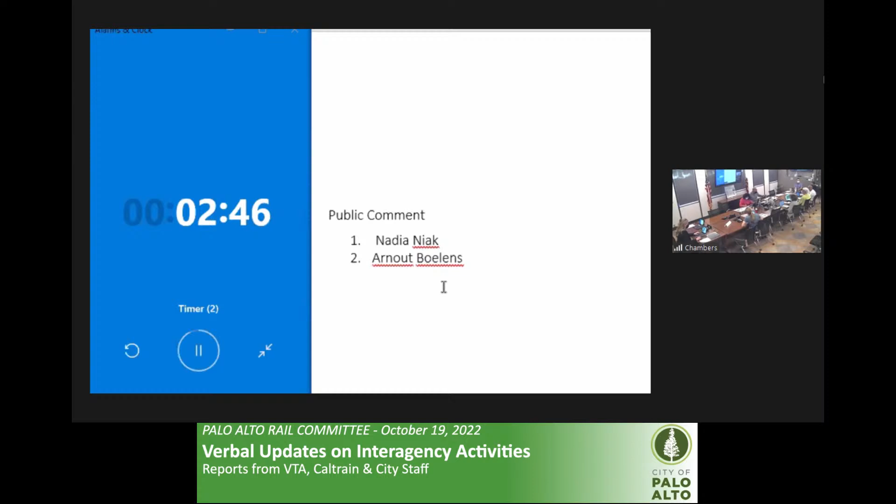Okay, we have a few speakers. So Nadia Niak, you can go ahead and make your comments. Thank you. I just wanted to see if we have an update on the Measure A 2000 money. I had done that research that there was Measure A 2000 money available for the update of the Palo Alto Intermodal Transit Center. And we'd expended about, I don't know, $200,000 of it, I think. And there's like 49 point something million left. Hopefully we can come around with our hat again and see if we can get some money from there. So if you could give an update on that, I'd appreciate it.

Good afternoon again. Yes, we are exploring the allocation that was previously from Measure A funds for our PAITC project. So we are exploring it, but haven't made any progress yet. I'm sorry, and apologies to cut in here, noting that I'm in transit, but we do have a response from VTA, which was recently shared with the mayor, and I'd be happy to share it with you at another time. You don't want to just share it now? I'm sorry, Mr. Kamhi. I'm just wondering if maybe we should all know.

Yeah, I'm so sorry. I definitely would like to provide an update on it. It's a little bit complicated, and unfortunately I'm driving right now, so I'm trying to concentrate on that so I can get home. But in brief, the VTA board had already prioritized projects for the use of that funding, and our project was not selected as one of the prioritized projects. So that's just the brief summary of it. Thank you, Mr. Kamhi.

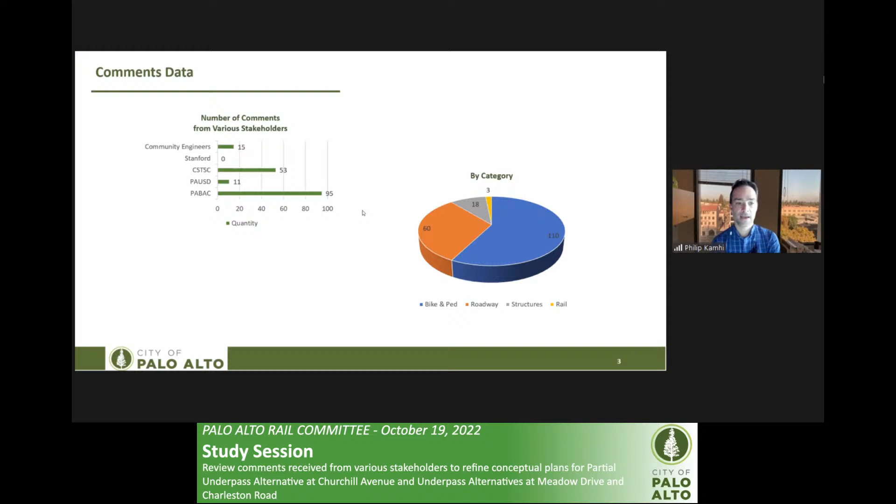And the next slide shows some additional details about the types of feedback, the categories that they fit within. And then the next slide. I wanted to also note that we had received additional information from the PTSA, the PAUSD subcommittee, and also there was a Gunn High School survey.

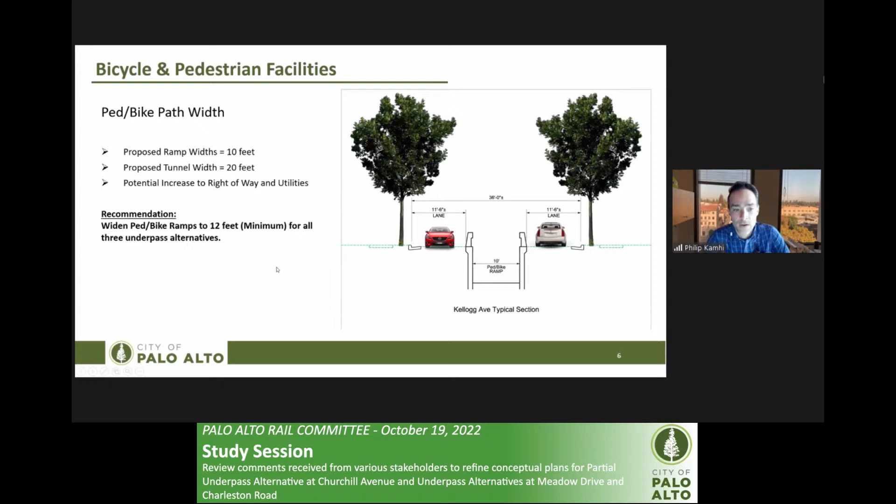So finally with that, I want to let you know that we're going to go through slides that have each of the additional refinement recommendations, and we'll pause with each slide for a discussion if Rail Committee is interested in discussing each of the items. And then this next slide, I'm going to turn over to our consultants at AECOM, Millette Letzinger and Peter DeStefano, who will discuss each of the proposed refinements and recommendations. Great, thank you, Philip. My name is Peter DeStefano. I'm a civil engineer with AECOM.

So let's dive into some of the comments from the stakeholders. Some have expressed a concern about the high volume of bicyclists that'll be entering the facilities and using facilities during the peak times shortly before and after school. Now, except for the tunnel at Kellogg, which is 20 feet, and the two-way pathway for the Meadow and Charleston alternatives, which is also 20 feet, the width of the ped bike ramps for all these alternatives was set at 10 feet. We're recommending an increase of this to 12 feet based on the comments received. This will potentially result in additional impacts to utilities and right-of-way and slightly increase the overall cost.

Could you hit? There's a little bit of an animation here. Yeah. You can take over the control. Or can I say again?

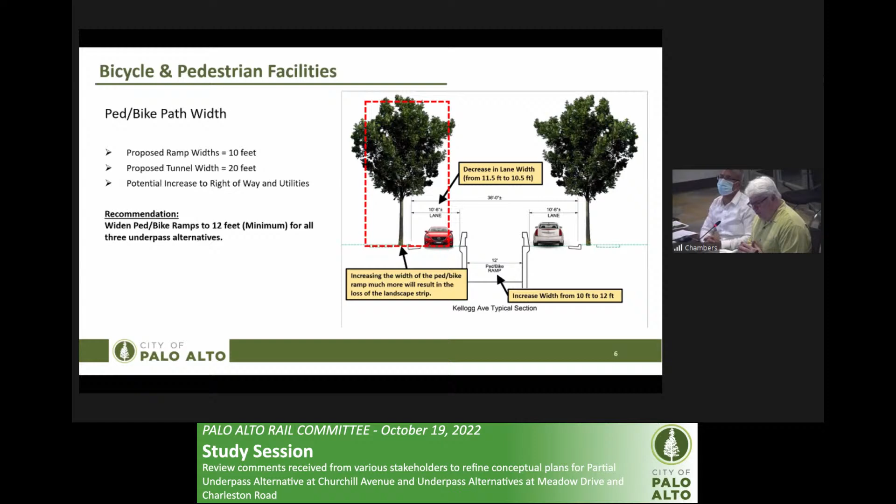So we're seeking the rail committee's direction on A, the width of the ramps. Is 12 feet sufficient, or should the width be increased beyond that? And B, whether conducting a traffic study to determine a level of service for bicyclists and pedestrians is desirable. Again, that relates back to the comments about the concern about high volume of traffic shortly before and after school.

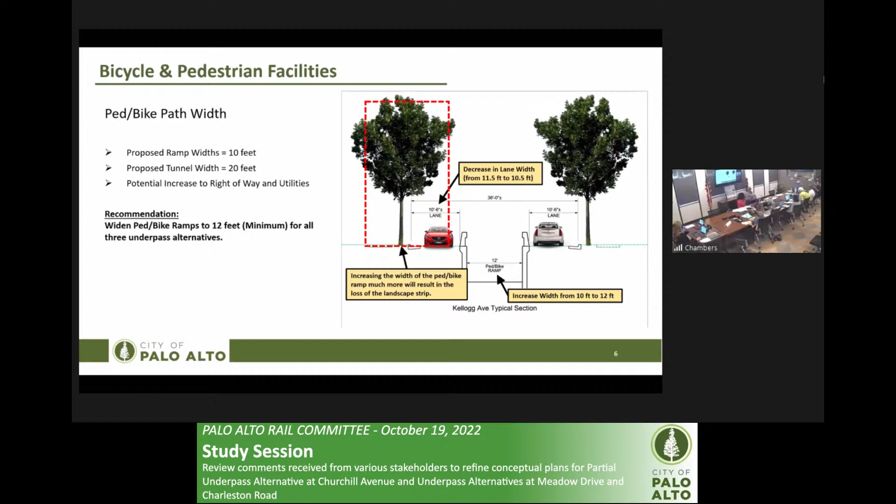So we can pause after each slide to seek your feedback, maybe. Okay, if you want to do it that way, but I also want to be cognizant of public comments. The public doesn't need to speak on everything, but they could. Yeah, they might have input. Okay, well, it's up to you. We can just go ahead and have an exchange. I think segments, questions, okay, yeah. That can be fine. And then we can have comments in that rather than. So do you want to go first, Mayor Burt?

Sure, thanks. So 10.5 feet for the vehicle lane. Is there parking or no parking on the streets in that model? Yeah, there would be loss of parking on the street. There's only 10.5 available for the traveled way. Okay, and the 10.5 foot lane in a residential street without high volume, is that pretty comfortable? Yeah, 10 feet is probably as narrow as you want to go. So 10.5, we'd be okay with that.

Okay, and then the Kellogg location, what are the current assumptions on, well, I guess this links with this traffic study question, which is really where is the bike flow coming from that might use this location versus Seale or something in the vicinity of Seale? And have we done any analysis of that yet, or have you engaged with our Safe Routes to School program to see if they have any such data?

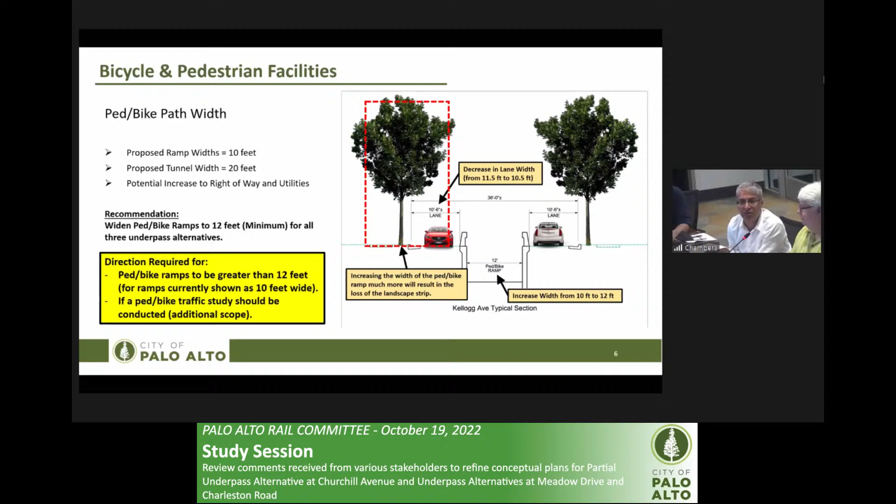One more question. Yeah, sure. So what is your outreach to the community on the two streets about the parking? Obviously, that's going to have to be pretty robust. Chair Kou, the outreach for merits of Kellogg versus Seale would be considered as part of the bike and ped transportation plan update. And as part of that, the outreach element will be included. Okay, thank you. Are there any other comments or questions? In that case, we can move to the next section. Very good.

So this is showing a plan view at Kellogg. The ped bike ramps that we have shown previously in the past couple of years on these exhibits were based on 8% grades of the ramp with 5-foot landings every 35 feet. Some of the stakeholders, some of the comments we received believe this is too steep and they would prefer a flatter slope. So you can see here on the slide, we show a 5%, comparing it to the 8% with landings. With the 5% grade, the grade is, of course, flatter, but it increases the length, in this case, by 80 feet. It would depend on how much the elevation difference is, but in this case, it's about 80 feet. So we're seeking the committee's direction on this item. Should the slopes be revised to 5%?

And the current slope is what? Yeah, so the limits of the pink are based on an 8% grade with 5-foot landings, similar to what you would see for the ramps at a ballpark. They're ADA compliant, but some feel that that's a little bit too steep for bicyclists. So they've asked us to revise that to 5%. So the drawback to the 5% is that it's similar to increasing the width. You have more excavation, you're increasing the limits, increasing the footprint of the project. It may impact some right-of-way, utilities, et cetera. So similar issues as before.

Okay. And at Kellogg, it's a little hard for me to see. Is that half of the first block in the pink? Is it all of the first block in the pink? Like, is that crosswalk at a street? I think it's halfway. Oh. Sorry, if that was Ripon, I couldn't hear you very well. Yeah, there's a crosswalk in the picture. I'm pretty sure it goes to the end of the block.

Peter, can we confirm? Also noting that Castilleja is on that corner. So if you expand past that intersection, you're now in front of Castilleja. And I'm assuming if you have to go further than the intersection, you have to build a wall and not let cars go through. That would also change the traffic patterns.

If you go back to the graphic, I think it shows the crosswalk. Right. Yeah, that's a proposed crosswalk as part of the improvements. So Emerson Street is further down the block, so it's maybe half the block. Oh, thank you, Ripon. Okay, I thought that was an existing one, that makes sense. It's a proposed crosswalk.

So it's half the, sorry, if you can go back to the Google map one, actually, that was super helpful. The pink right now at 8% is half of, is that the whole block? Oh, there we go, I see. When you say the whole block, you mean to Emerson? No, definitely not. I want to say it's less than half. Looks like there are 10 houses between Alma and Emerson on Kellogg. And how many are shown on the pink one? About 5. Okay, so we're already at half the block at 8%.

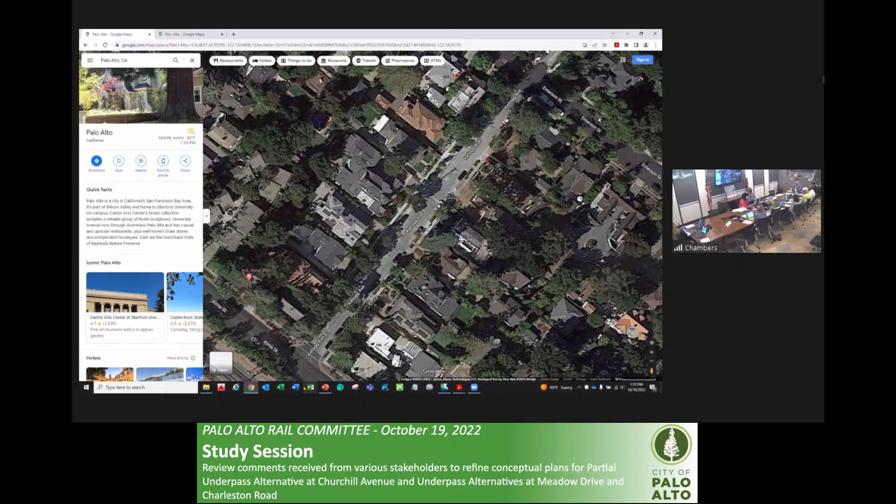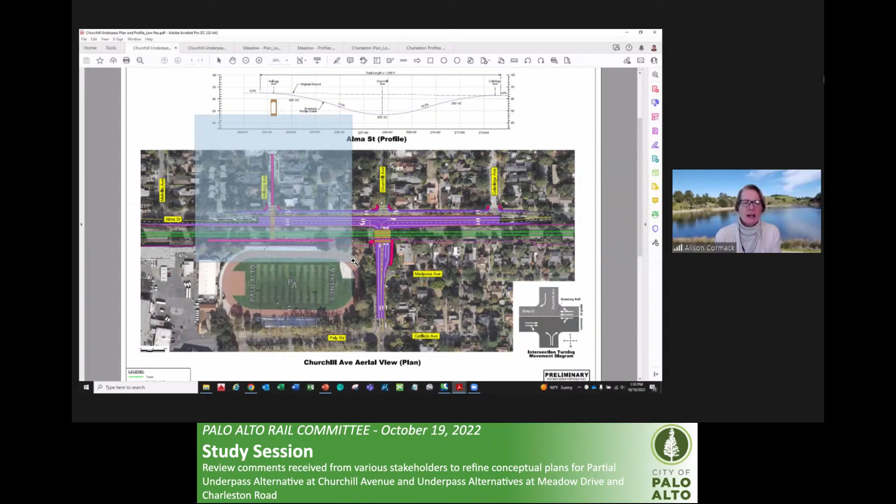Maybe this image is better. Better? No, not really. Well, it does show the houses though. I think that's really what's helpful is to see the houses. 1, 2, 3, 4, 5. About 5 houses. Okay, so halfway through. Okay, great. This is a tough one for me.

This is the difference between what is doable and what might be ideal for one mode of travel. So this one is hard for me. I think just at an order of magnitude, it would be much more expensive to do this than to do the 12-foot that we just agreed to on the prior slide. And I see Mr. Kamhi nodding. So unless there's something I'm missing about some particular use case, I think 5% seems like it would be ideal, but since we don't have an ideal situation, for the time being, I'm comfortable with the 8 and the landings, which I think everyone will appreciate.

Can I just add one thing? I don't think we're trying to make a final decision on what's going to be constructed. We're just trying to make a decision on what to move forward with in the planning phase here. So I don't want anyone to feel like the decisions made here today are going to last a lifetime. Correct me if I'm wrong, Ripon. Right. It's for the refinement of the conceptual alternatives. So the question is, should we refine the conceptual alternatives to have a 5% grade and see what that looks like, which has impacts, as you mentioned, or should we leave it at the existing 8% grade as was originally designed in the concept? Go ahead.

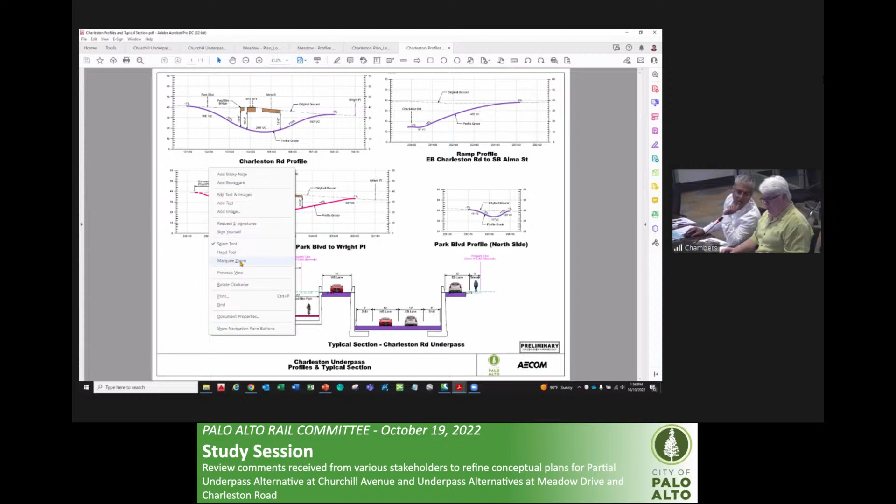I have it up here. I'll pull it up. So this is the one at Charleston. This is the main ped bike ramp. We do show it at 4% on this side and 5% on that. Are there other ramps you're talking about? Correct. Okay. Because this is a pathway, right? I'm talking about ramps. Oh, you're right. I know what you're talking about now. Thank you for clarifying. There's a ramp over here. Let me zoom in. I forgot about this one. There's a switchback ramp here that's based on 8%.

Correct. And in this particular case, changing to 5% would have property impacts, so keeping it at 8% with that same landing would minimize those kinds of impacts. Yeah, we're probably looking at some kind of different configuration of this ramp to avoid the impact to this property over here. Thanks, Ripon, for mentioning that.

Can you go to Nadia? Okay. Thank you. So I wanted to thank Ripon for his comment, because it's hard to apply a formula to one side and not think about the impacts project-wide. The 5% is a lot. I remember Penny Ellson saying 5% for little kids, right? So it's not the average bike rider, not a full grown man. It is little kids having to get themselves over the area. And depending on the location, if you talk about the Seal one, for Old Palo Alto it actually allows access to Peers Park, which would be a huge benefit, but means a lot more families, strollers, and little kids than the Kellogg path would be used for in the way that we're thinking about it now.

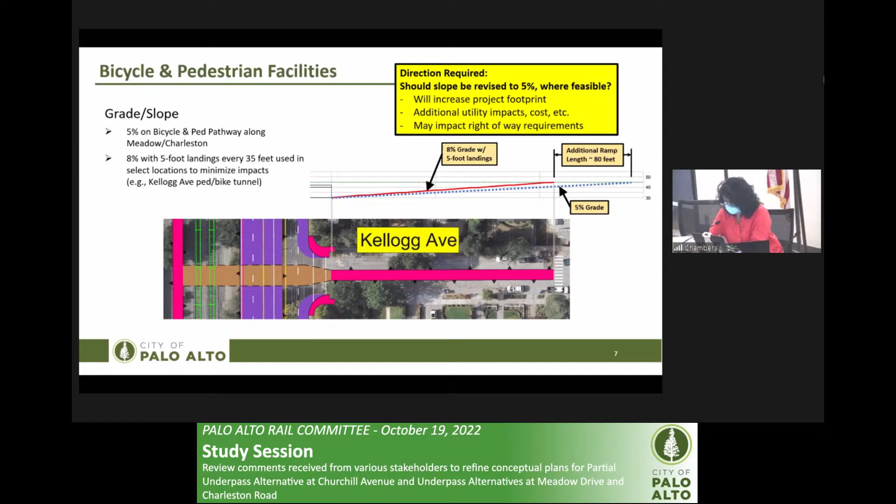Okay, if we're done with this, next section. So do we have a direction to see if it's continuing at 8% slope with the 5 feet landing every 35 feet? Any comments from colleagues? It might be too early to kind of look at right now. Feedback. Yeah. Thank you, Ripon.

Yeah, and I just wanted to add, I'll put on my safe routes hat really quickly, that it's not just the wheelchairs and the kids, it's also the adults with the bike trailer carrying the kids that should be a consideration, because that's difficult sometimes as well. I don't know that we need real specific direction on this one, other than to note that this was a requested refinement. And if we want to do this kind of refinement now under our conceptual design, then we can. If not, it could be something that continues to be considered as we go through the process.

So I would support that we stay for the time being with the 8%, not ruling out the 5%. And if Kellogg does emerge as a preferred alternative location, then we probably want to look at both options. Chair Kou, can I? Oh, yes, please. Sure, thanks. Two follow-ups. Specifically one on Kellogg is, what implications would that have for the ramp at the other side? We've only talked about the Kellogg side. Is there room even on the other side to do 5%?

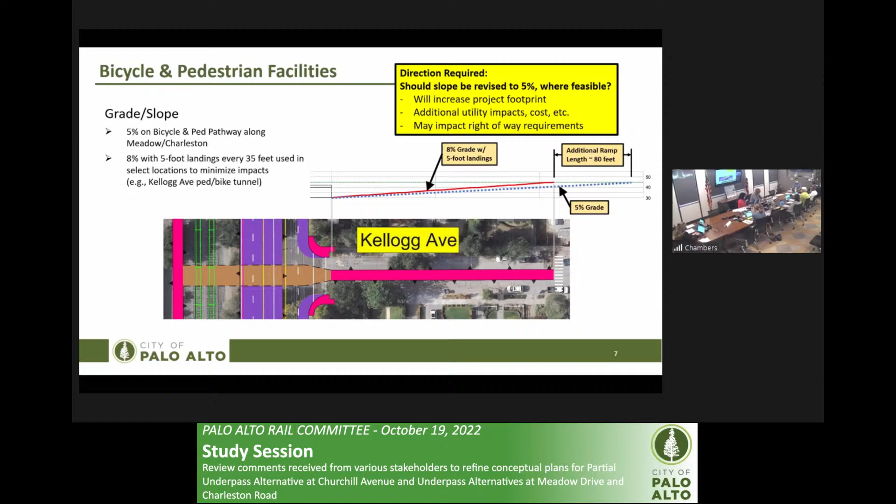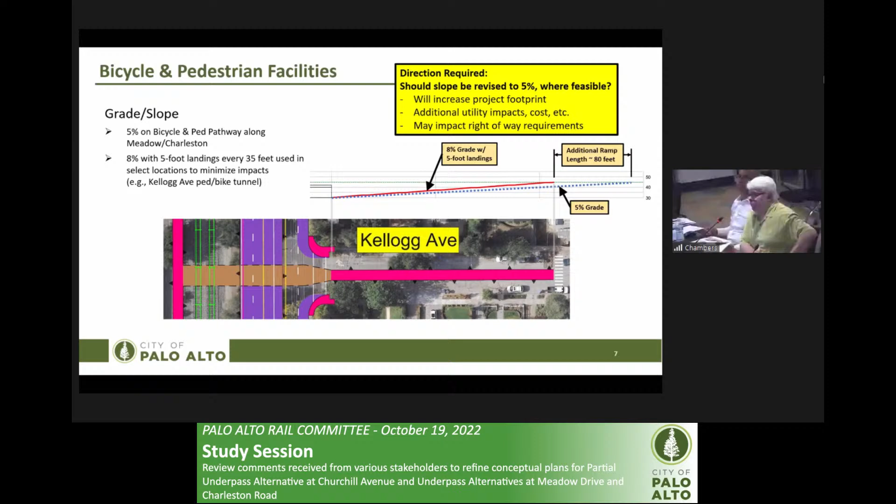On the south side ramp, we'd have to take a closer look at that. It's getting a little bit tight, but on the north side, I don't think there's constraints. So I believe it could be done on the other side of the tracks as well. Okay, I think of them as east and west of Alma, but I'll try to translate that. I'm thinking of the side on the Paly side, on the high school side. Is there room? When I said north south, I meant north south of the tunnel. So okay. It's confusing. She's talking about the other side of the tracks, which is the 30-yard line on the football field.

Yeah, we pull that up. You're talking about over here. Yeah. Yes. Okay. So the Paly's west. Makes sense. Right. This is west of the track. So yeah, I was talking about this ramp north of the tunnel, to the left of the tunnel. There's really no constraint here. You're starting to get into the constraint over here with Churchill. Okay, so it's not. Go ahead. Yeah, we think there's enough room there, but we'd have to verify it.

Okay, that's helpful. And then I see that Nadia helpfully sent us some super easy to understand visuals of Rengstorff that Mountain View is doing. What is the percent grade they're using? It looks like they're doing what I would call the University Ave approach, where the bike and ped lane is not as fully depressed as the road. Does anyone know what the grade is in Mountain View for bikes in that hybrid? For the road or for the pedestrian? For the pedestrian path. I don't have that information. Do you know that, Noah? No. We don't have that information. Just something to think about.

I'm in alignment with Pat on this. I don't think we should drop it from the list as a nice to have. But I don't know that there are very many really young kids using this as a safe route to school at this point. It's not near an elementary school. We'd have to think through some of it. But I'm comfortable with Pat's restatement of what I said earlier.

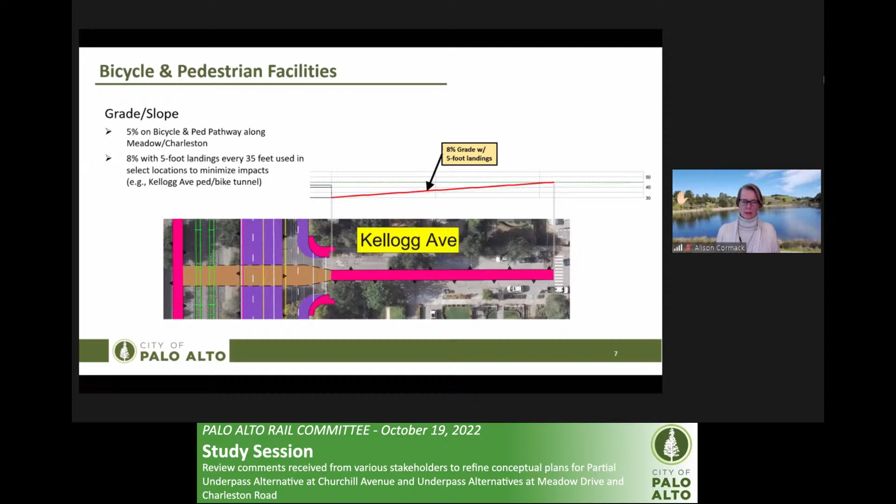Yeah, thanks. And can we have that prior slide back, because that prompted me as Allison was talking about what we call the west side of the tracks. The exhibit? Sure. And what you showed there, this pink line that's perpendicular to the underpass, that's where we have the current bike path behind Paly. And where are you envisioning that even a 12-foot ramp would fit? We have the fence to the Caltrain tracks, and then really only about a foot or two on either side before we hit the Paly fence. So where are you envisioning this would fit in addition to the existing bike path?

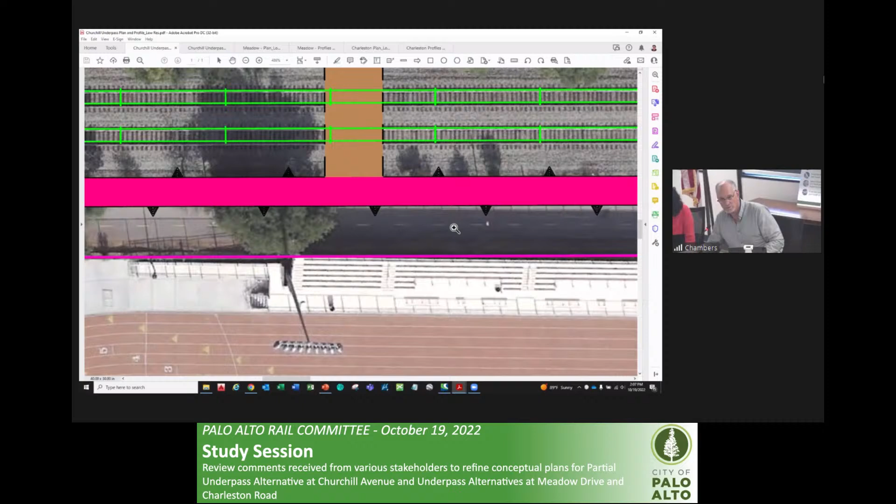Yeah, so the retaining wall will be right along the edge of the existing path. In fact, the next slide... So would this intrude on the Caltrain corridor? The existing path is already inside the Caltrain property. But would this intrude additionally in the corridor beyond the existing path? Yes. Okay. That's a big deal to Caltrain. They gave us that access back

25 years ago, almost. And they weren't envisioning what they have today. Now, they still have 4 tracks on the table. There's no way that they're going to give it to us as long as they have the 4 tracks. We don't think that's feasible. But even then, I think we need to put on the table that Kellogg necessitating access to the Caltrain right of way for this is not a small deal. Absolutely, it is not, and it's a good point. And when we get to Seale, I need to look at your design, but my assumption is we were going to look at continuing in the same direction because we have park space there.

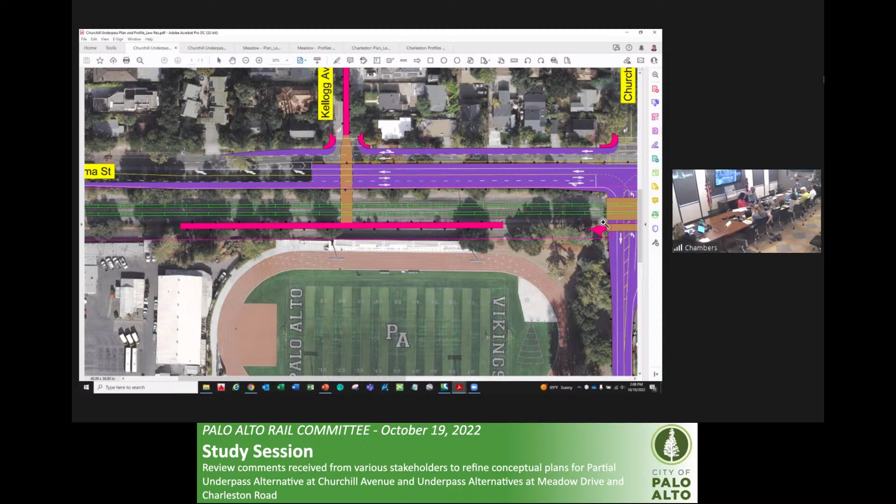Okay, right. This is a good segue into the next slide, because there was a comment from a stakeholder about reconfiguring the ramps here on the west side of the tracks at Kellogg. Let me pull that one up. I believe this was a comment from someone at PABAC. Correct. Do you know who that was? Art Liberman, I believe. Yeah, so the area of concern is over here where the tunnel daylights to existing ground. So let's go ahead and zoom in and take a look at this area.

So this is the current layout. This is the ramp coming down towards the tunnel on the left for the tunnel underneath the tracks to Kellogg. And in this configuration, bicyclists coming up the ramp will exit out and then want to slide over and get onto the right side as they head south or to the right. And then bicyclists traveling in the opposite direction, if they want to stay on the path and head towards Embarcadero, there's this potential conflict here.

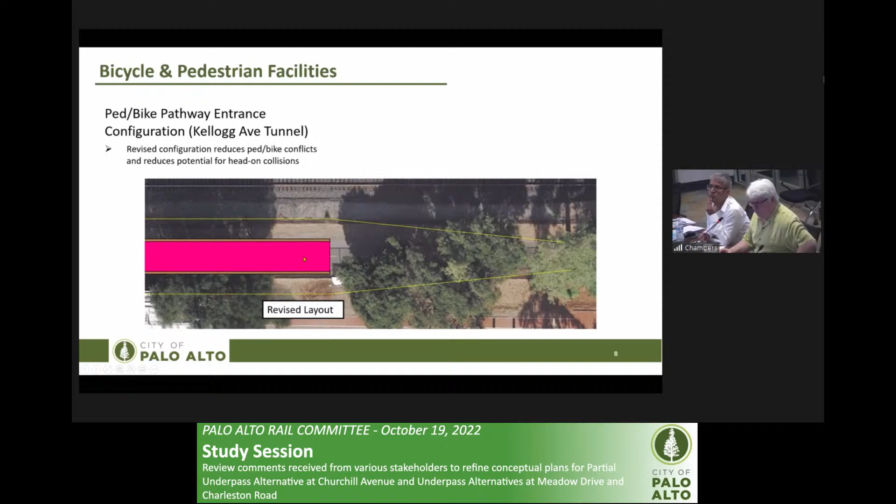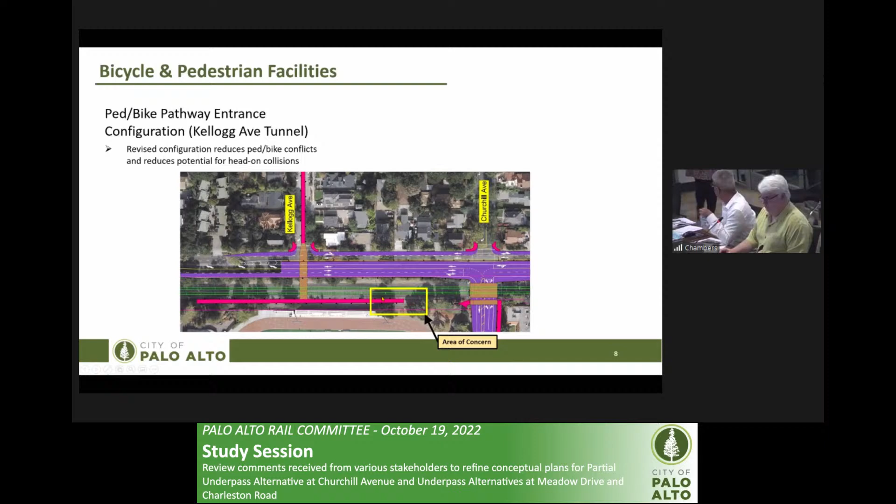So there was a suggestion by Art to reconfigure this layout as such, to slide the ramp over closer to the high school, closer to the bleachers, and then split the ramp, have a unidirectional on each side at grade, so each direction doesn't have that conflict. Peter, this is the west side, right? Of Alma, okay. Right. Let me go back to here. We're specifically talking about this area on the west of the tracks between Churchill and Kellogg. So again, this is the current layout, with potential conflict for bicycles traveling in opposite directions. And this revised layout would eliminate or minimize that conflict.

So we're seeking direction from the committee about whether this configuration should be considered. Of note here, and this goes back to Mayor Burt's comment, is how does this impact the school potentially? It has essentially the same impact within the Caltrain right of way, but this will push everything out further west and impact the school's property. So that's really the drawback. It's a safer configuration, but it does have its shortcomings in that sense.

Councilmember Cormack. Thank you, Chair Kou. Mr. DeStefano, would we do the same thing at the north end of this west tunnel as well? Correct, it would be essentially a mirror image. Okay, I like this idea, and I think it's reasonable to ask one of our many partners in this, the school district, to help us out with this space. I think this makes a ton of sense.

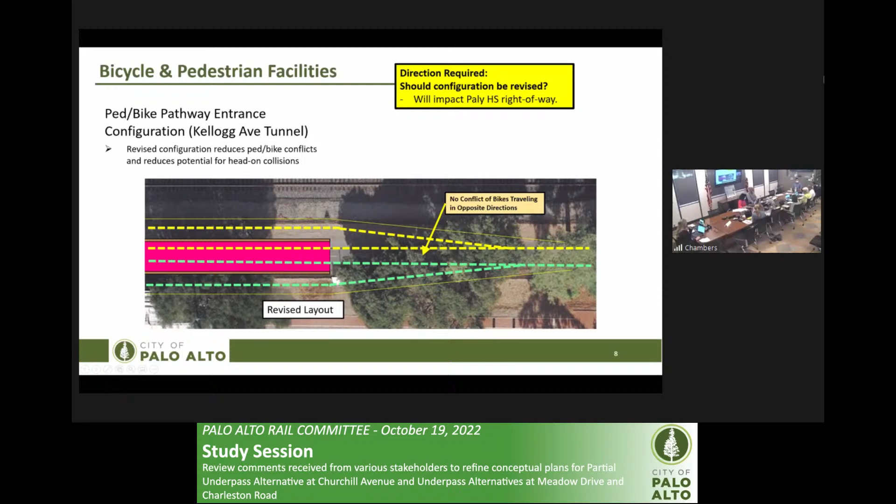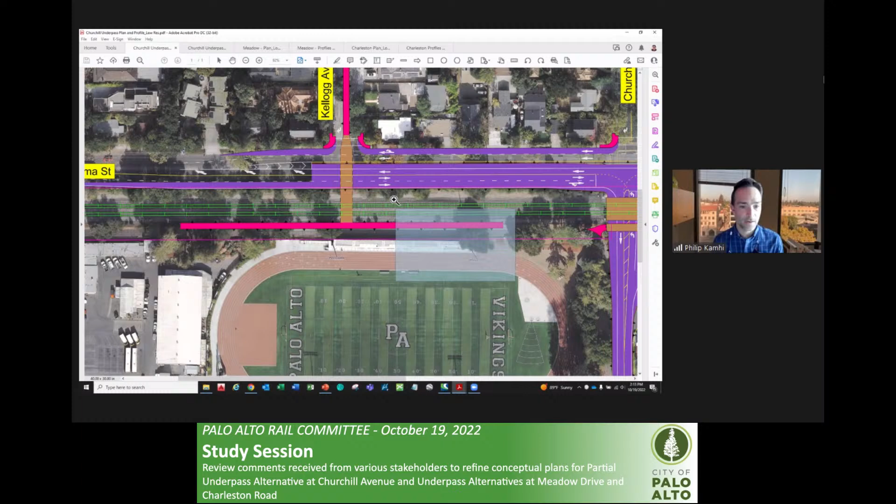So how will it affect Palo Alto High School's right of way? This is Mr. Liberman's suggestion, right? Oops, sorry. Yeah, the yellow line here would be the edge of the path. And I believe it almost certainly would encroach inside the school's property. Maybe I could go back. You can see it a bit better here. Currently that area there is where the bleachers are on the track. Not that it overlaps them completely, but it at least would push up against the bleachers, or potentially would require the bleachers be relocated or adjusted.

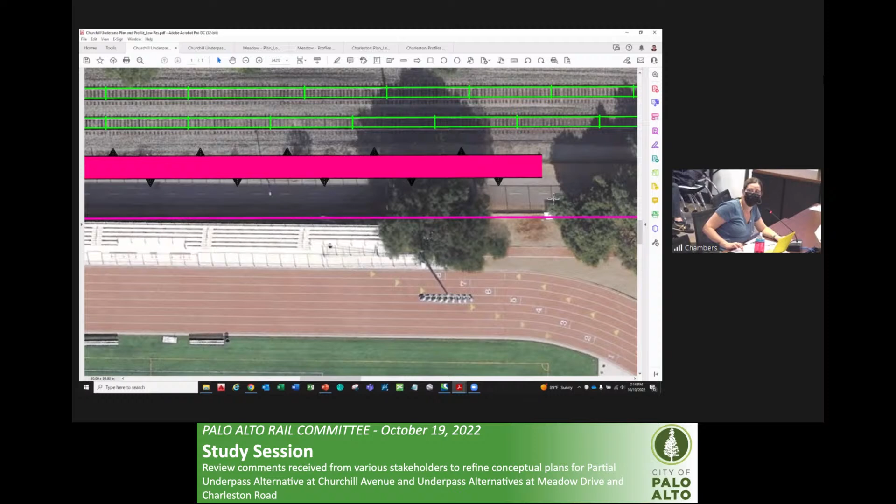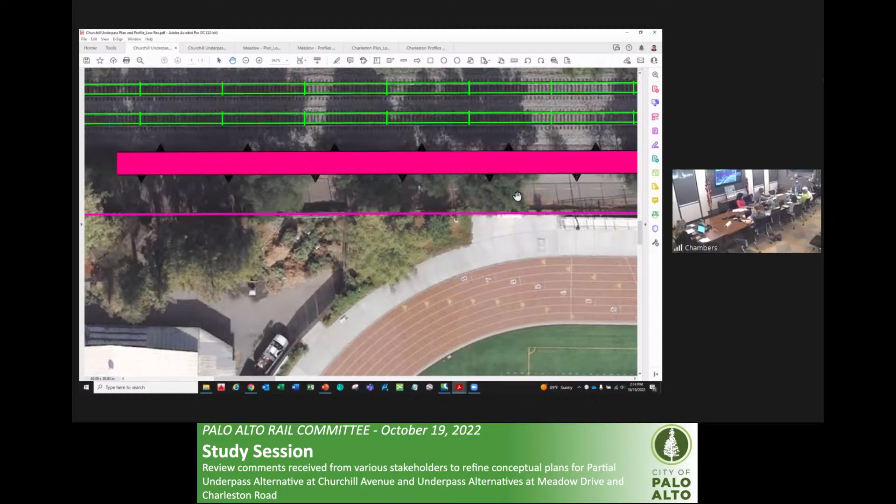I concur with what Philip just said. The bleachers may have to get redone somehow to accommodate this extra width. I also did want to point out that the matrix only talks about what would happen in the Kellogg scenario. It doesn't actually mention the Seale scenario, as best I can tell. I'm looking at line P, which talks about the construction impacts and explains what would be in the right of way and what isn't. I didn't see Seale anywhere. Correct. Seale is a new task, and that hasn't been accomplished yet. So we are waiting on that. Okay, thank you.

To make these maneuvers safer, we're recommending looking into mitigation measures such as flashing beacons or a HAWK signal in the subsequent phases of the project. For those not familiar with HAWK, that's an acronym for High Intensity Activated Crosswalk. That's where a push button activation or a motion activation could actually trigger a signal. So those are the recommendations that we're making to make these crossings a little bit safer for pedestrians and bicyclists. And to add to that, we will seek additional input from our community in finding out the best solution, and that would be done at a later phase of the final design process.

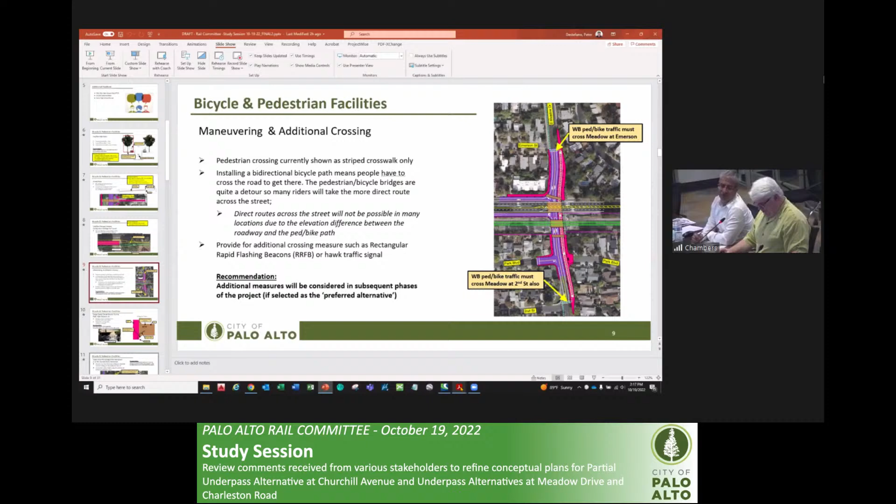Yeah, and this is specific to the Meadow and Charleston underpasses where the two-way bike path is on one side of the street. So in one direction of travel, in this case Meadow traveling west, they have to cross twice. On Charleston, going in the opposite direction, they also have to cross twice. All right, to answer your question about the brown thing, I'm going to take a look at Meadow and zoom in here. I think you're asking about this. Yes. What's that? So that is a bridge that spans across Meadow. It allows pedestrians and bicyclists traveling northbound or southbound on Alma to get across Meadow.

Sorry, which way is north in this? I'm sorry. Going to the left. Yeah, north we're considering to the left there like that. I know it's not true north. Okay, that's fine. So, okay. Why is that little brown thingy bridge, I don't know what to call it, is that bi-directional?

Yes. Okay, so the reason someone coming westbound on Meadow would not stay on the north side of Meadow and then use that is that it connects to the top level and not the under level. That's correct. Okay. Yeah, they could use that, but then they'd have to circle back in the opposite direction to get over here. I see. Okay, if you could go back to the main one now.

And the question here is, I read through all of the entire worksheet, and let me just stop here and thank staff for doing such a thorough job, and to all the members of the public who submitted comments. I don't know how many years we've been doing this, a lot, but this was one of the most effective ways to sort of understand the concerns and recommendations, and to see the staff response. It was fantastic.

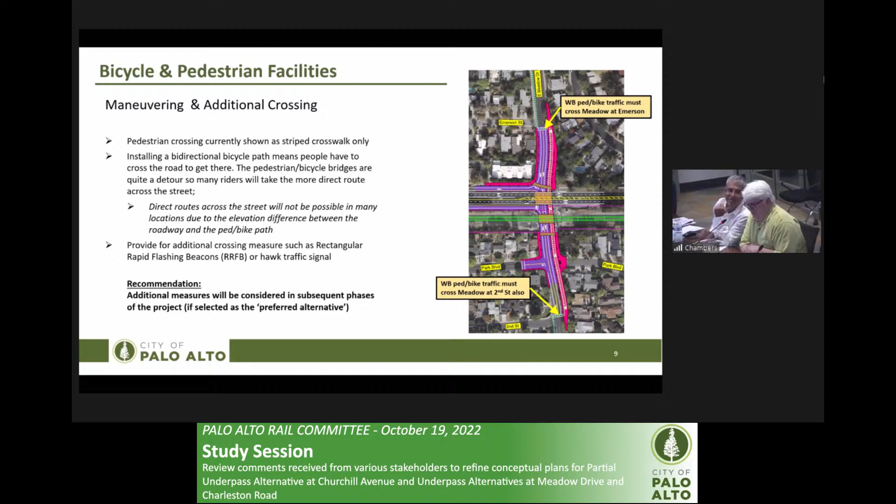And also for reference, all brown things are structures, so they are structural elements in all the slides. I did figure that out. I mean, I called them bridge thingies, but yeah, I got it. Yeah, and our bad. In the past, we've done a little animation to show a little dotted line so you can understand the pathway, but next time we'll bring that back.

So I just want to say that I appreciate all the mitigations and the creative ways of getting bike peds into a very narrow road. So I just want to make sure, with the great number of different ages and abilities to use these pathways, obviously we want to make sure that it is straightforward so that there's no confusion in crossings and so forth. I mean, I see the Emerson crossing, the 2nd Street crossing, potentially, I do see that there might be confusion there, as well as causing traffic to back up over there.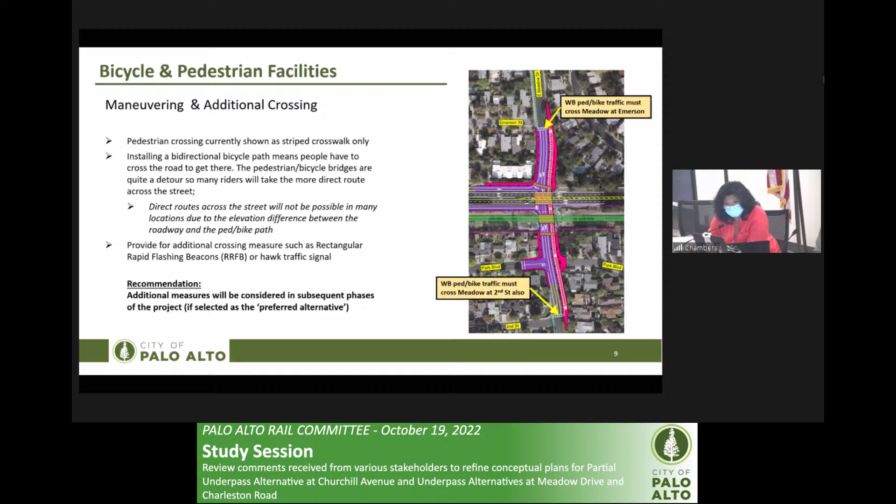I also want to add that the flashing beacons, there's one on Clemo and at Arastradero, it's very difficult to see the flashing. So that's something that needs to be addressed as well if this is going to be a means of ensuring that crossing is going to be taking place. Yes, we'll make sure that visibility issues are addressed and that those are taken into consideration when designing those facilities. Thank you.

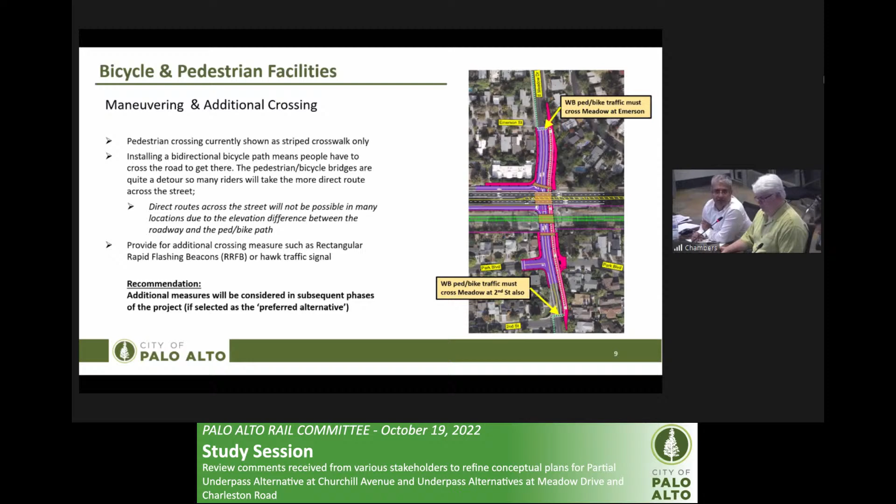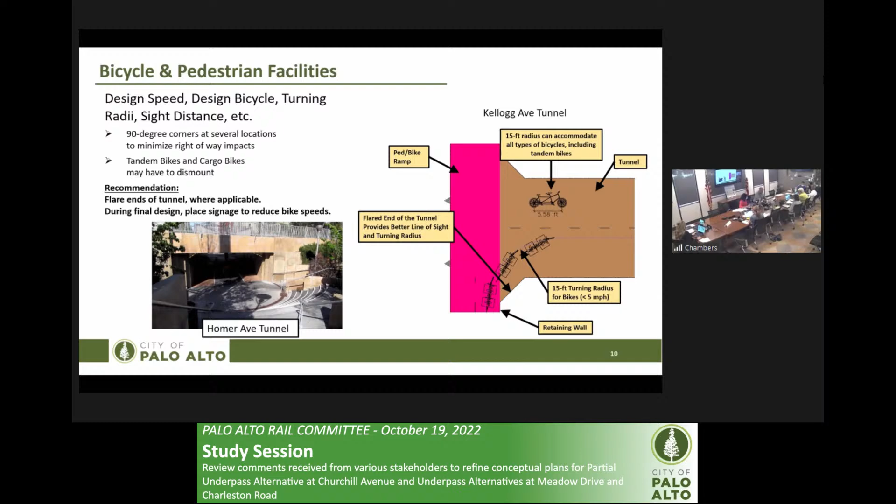I'm sorry. So just to note one more thing, because my staff's asking. We also looked at not just tandem bikes, because I don't know how often you've seen tandem bikes, but that's meant to illustrate a long bike. We also looked at bikes with trailers and other bikes as well. So just wanted to note that for the discussion.

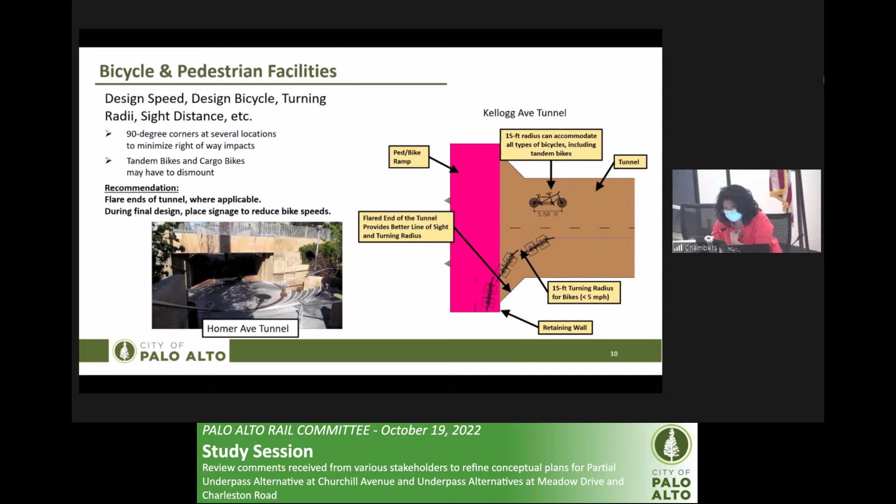And to answer your question, I don't think we need anything unless the rail committee disagrees with the recommendation that we have, which is, of course, to flare the ends of the tunnel where we can. And we are open to suggestions. So thank you, Mayor, for adding that information. Okay, then if we're good, then we can go on to the next, please. Very good, thank you.

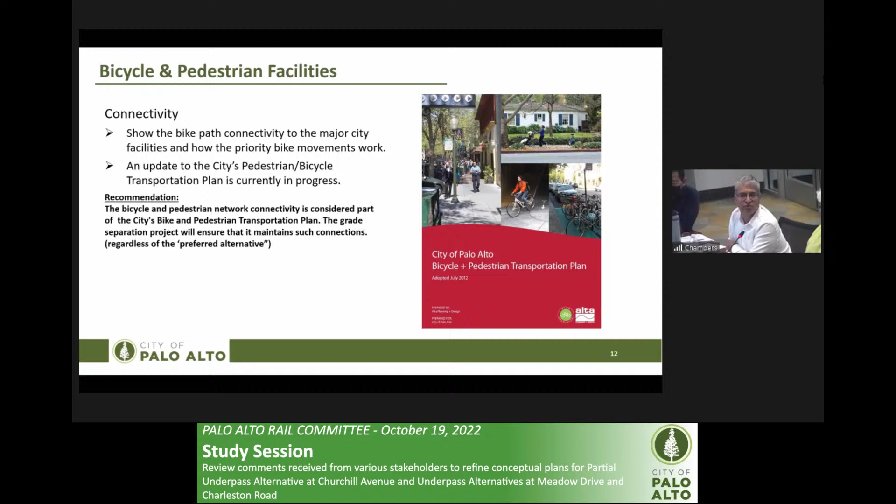So network level connectivity and network level bike and ped movements and traffic circulation will be part of the bike and ped transportation plan. And the elements from there could be implemented as part of different projects. Okay. Next.

Oh, sorry, Chair Kou? I'm sorry, I didn't see you. No worries. It's very small. Just want to point out that person in the middle is not wearing a helmet in this photo. So in the next go round, maybe we could just have our comms people take a look and ensure that there's a helmet front and center. Thanks. Okay.

You know, I just want to note this was the 2012 bike and ped plan. So, yeah, I get it. It wasn't on your watch. I get it, certainly. We would not have a photo like that on ours. I'm sure someone would catch it before it got out. Oh, and look, people are actually walking on the sidewalks instead of in the middle of the street like we now do.

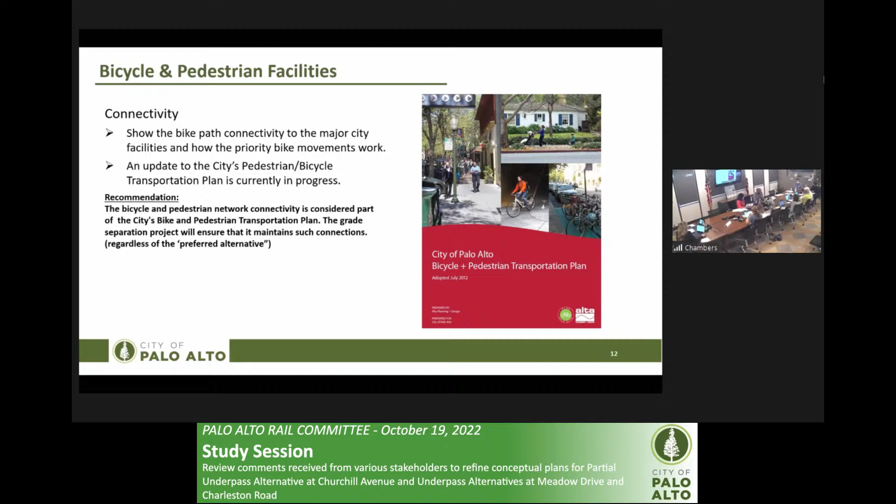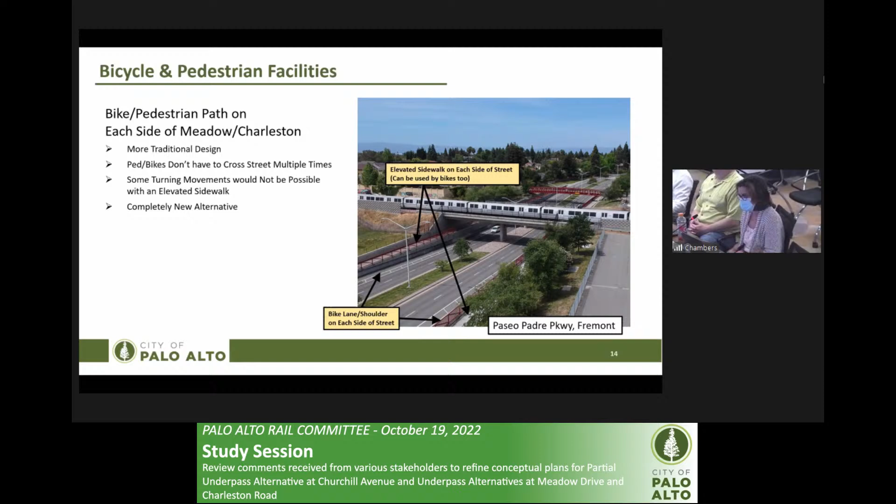Similar to the current underpass study alternative, there are some turning movements that would not be possible at the intersection of Alma due to the elevated sidewalks with this alternative, if we have sidewalks on both sides. Obviously, to develop this alternative, it has significant geometric changes. So we're requesting direction from Rail Committee on whether a new alternative should be developed with this configuration.

And also to add to that, this was in a recent letter received by the committee from PABAC. This was one of the most emphasized points, that they'd like to see bike facilities and pedestrian facilities on both sides of the street. So just wanted to note that. So separated is what you're saying? Separated and on both sides, yes.

Okay, Councilmember Cormack. Thanks. So I jumped the gun on this a little bit, but I appreciate staff coming forward with this. One of the things we haven't talked about yet is having people walking and people on wheeled things at the same time, and separating them so we don't have four different sets of issues in one place, which is what the prior version has. I think it's beyond wise. I just feel like it's going to be necessary.

I think the other thing that happens here, and we haven't talked about it, looks like the grade is already improved, right? Because it doesn't have to go down as far as the cars do. So I realize this comes with additional costs. This to me is an example of, as we work through things, we find things that we need to refine, and this falls squarely in that category. So I'm supportive of us looking at an alternative that allows people on bikes and people walking to be on both sides of the street in the natural direction of traffic.

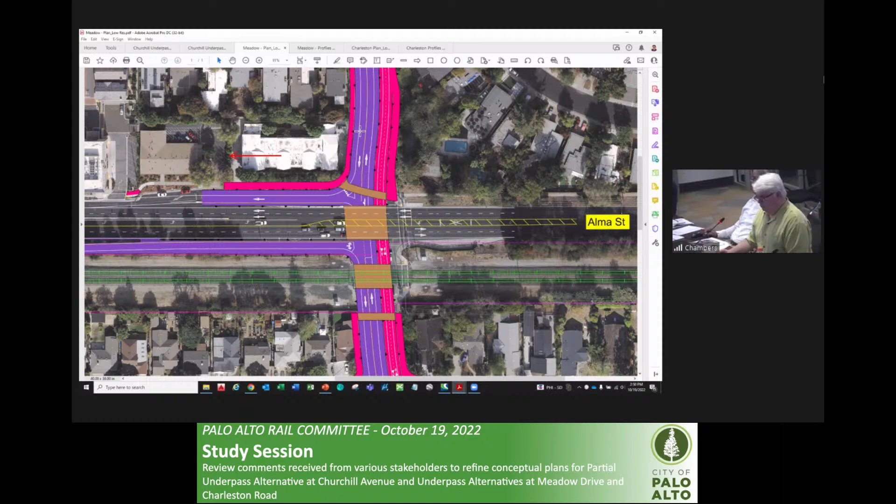Just a point of clarification, using slide 9, Millette, could you explain exactly what turn movements wouldn't be possible? Yeah, I can maybe answer that for you. Did you say slide 9? Oh, sure, if you've got the overall map, even better. So let's take a look at Meadow, for example. This right turn movement onto northbound Alma would not be allowed, and conversely on the other side, southbound Alma connecting to Meadow. But weren't those the ones identified? We literally added a turn lane there because that traffic movement was so important. Southbound Alma making a right onto Meadow serves that entire neighborhood.

Right. And if the same thing were to happen on Charleston, I'm assuming you're limiting some pretty significant turn movements at pretty significant intersections. Oh, yeah. From a traffic standpoint, we're not saying it's going to work well, but it's something that we could look into, seeing what can be done to accommodate those movements. Potentially a roundabout similar to Charleston could be implemented. Of course, that's going to require additional property acquisitions. I think that's why Millette emphasized that from a traffic standpoint, it's not going to look the same.

I mean, it's essentially a completely new alternative. In fact, I would also add that implementing this idea is probably more suitable at Charleston because, like you said, Nadia, a key element of this design is to have that connectivity with Alma. Whereas on Charleston, I can pull up Charleston real quick. Charleston's a little bit different, where there's only one direct connection to Alma.

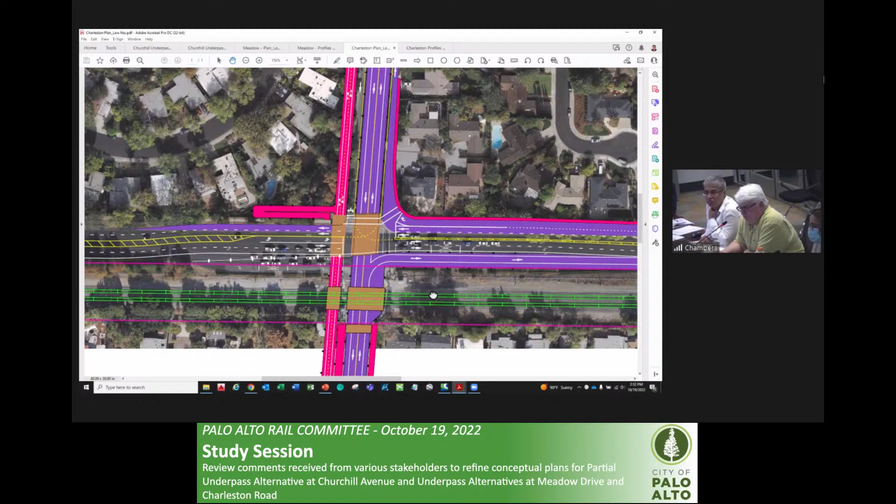Right. So what would happen in this situation here in Charleston is they wouldn't be able to make the direct right. They'd have to enter the roundabout and make the U-turn. Does that require an additional lane over here? Probably. Again, we'd have to look at this as a whole and see how it could work. Yeah, and I think part of the discussion we've been having today is you want to prioritize bike peds as well as vehicles. So that's one of these opportunities where you could look at some of that and how you could maybe balance that out.

Yeah, certainly, if we look at the traffic at first brush and it's a no-go, we wouldn't proceed, or we would bring that information back, right? Yeah, I mean, literally the entire design of this as it was originally proposed was wholly based on the commute movements. In the morning, people come from Mountain View and at Charleston make a left turn, which we've now put through the roundabout because it makes it a slow and constant go. But in the evening, that reverse commute is that right turn that you're talking about, and blocking that movement seems like it would fail every traffic thing.

And I just go back to the whole point of all of these grade separations is to leave us in a better stead, and limiting turning movements at either Meadow or Charleston is almost a non-starter, in my opinion. Yeah, and just to reiterate what Millette just said, it probably makes sense for us to look at it from a general traffic standpoint first before we develop all these exhibits and refine the geometry if it doesn't work from a traffic standpoint. So that would probably be the first step, right? To see if it even works.

And if I can, I should have mentioned this at the beginning, but we have all these comments from the various different stakeholders, including reaching back out to the original designers. First of all, thank you very much for all the feedback that we received from everyone. But the original conceptual designer of this, Elizabeth Alexis, her concept had the bike ped path on one side, not on both sides. And the reason for that was the accommodation of the vehicular traffic as well. So Pat, do you have anything that you'd like to comment or question on?

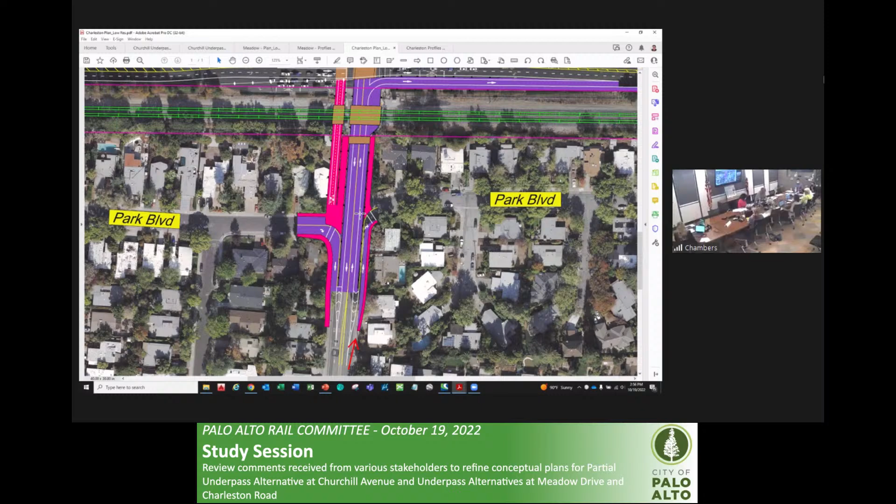Yeah. If you want to get to the other side of Charleston, you'd either continue straight over here and then cross, or if you want to get to Park on the south side, you'd have to do a 180 and cross the bridge here. So come down the path and get onto Park. Which is not so bad. And if I'm coming from the other direction, from the west, from Gunn High School, say, in the afternoon, and I want to get to the other side of Alma, I'd take the reverse of the same route. Exactly. You again go on this bridge here, come down, do a 180.

And get on. I'm sorry, it's hard to hear whoever's speaking right now. Yep, we got a mic now. My apologies. Keep forgetting about the mic.

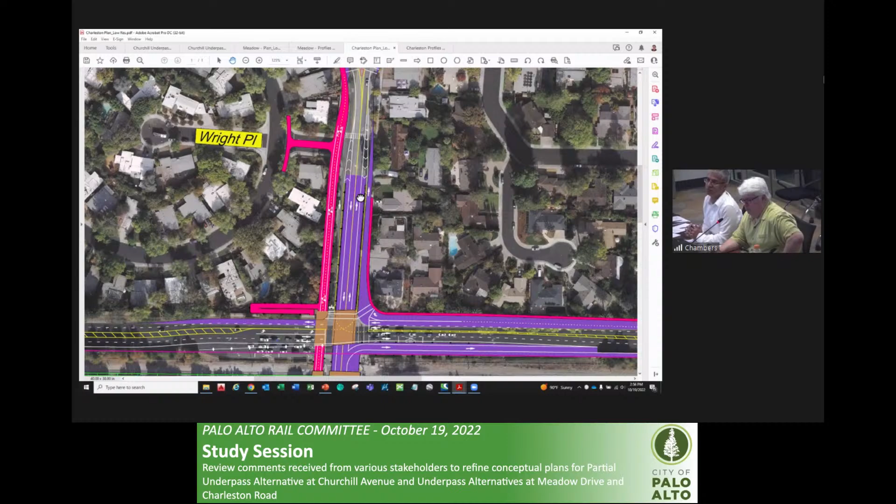Yeah, so if you're heading in the eastbound direction as a bicyclist and you want to get to the other side of the tracks, you would continue along this path here, across the bridge, and then travel in the opposite direction, do a 180, and then this would descend underneath the tracks and underneath Alma Street and allow you to get to Mumford and beyond.

Yeah, and then so we've maybe got two points of reference. One is what would be the ideal bike and ped flow, which would probably be both directional movements on each side of Charleston. But the other point of comparison is to what we have now. Right now, we have one directional on each side of the road, interrupted by a signal and a train crossing. So I think it would be helpful for us to do those two comparisons.

A reference point of how much better is this from a bicyclist standpoint than what we have today, and how much less ideal is it versus if we had two directional on both sides of the street. And yeah, I just think that's a useful and important point of reference.

To clarify, is better from a delay perspective, like timing? Like yeah, I guess that's probably the most quantifiable metric: on average, what would be your time of travel if you're trying to go each direction by bike. And then qualitatively just describing the inconvenience, or greater convenience, whichever it may be.

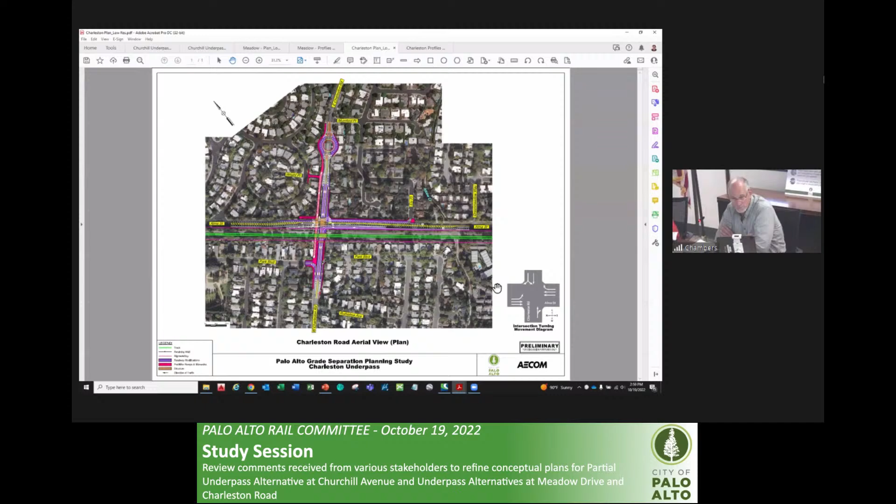And lastly, have we looked at any other dedicated crossings for the long term south of Charleston for bike and ped? Because we have a long stretch from there to San Antonio, and San Antonio doesn't really lend itself to a good crossing even. So all the way into Mountain View, bikes and peds don't have a good dedicated crossing. And I thought that we had at one time in the bike ped master plan a reference to that. In the current plan, would it be?

Nadia, do you know? I think it was in the Rail Committee's 2013 report, and I don't remember if it was at Adobe or at Fern. Yeah, Ripon thinks it was Adobe. Yes, I believe there's also a council direction to look at South Palo Alto, including Adobe, for bike ped transportation plans. So then when we look at this issue, should we be coupling it with looking at a long-term dedicated bike and ped crossing somewhere in the vicinity of Adobe?

And then the concern on the two ways on each side really wouldn't be such a problem, because it's all those people who live in those neighborhoods south of Charleston, east of Alma, who are struggling with this maneuvering. And as we're long-term really trying to open up the connectedness on the two sides of the tracks, in particular in South Palo Alto, which doesn't have grade separations for bikes and peds today at any location, this is something that we should be having, I think, in our long-term plan.

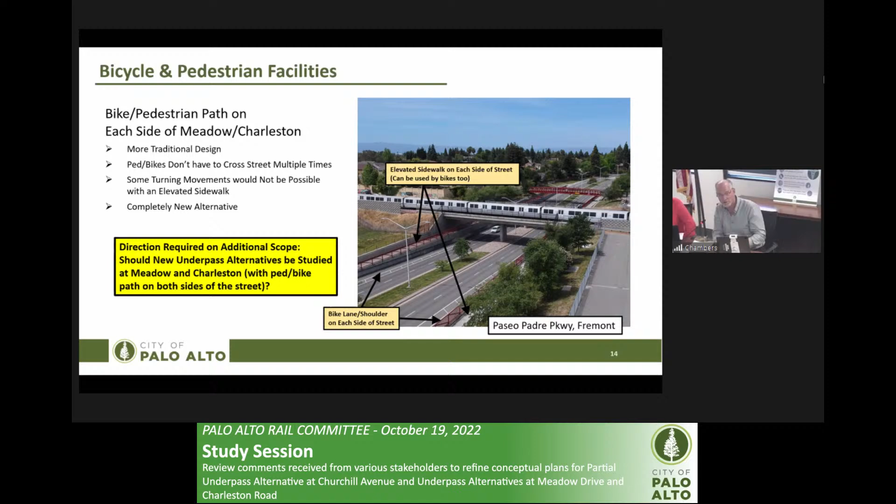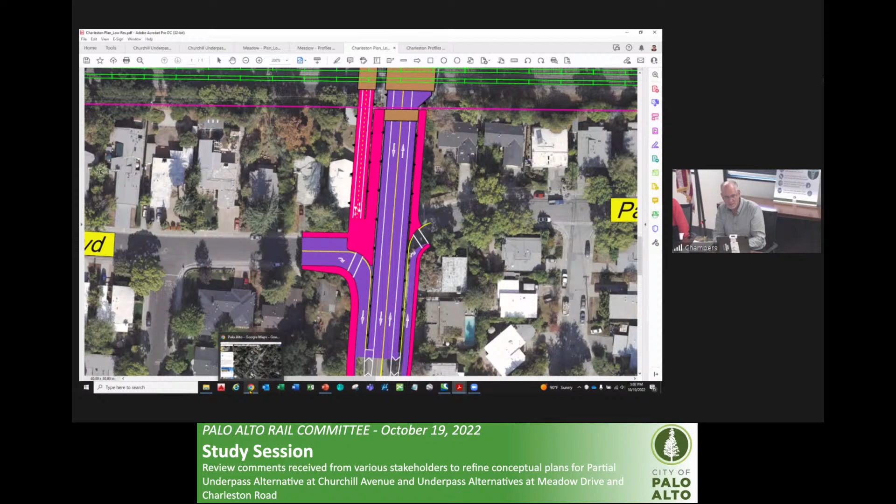Thanks. That makes me realize one other follow-up. This 180 turn that we would be having on the north side of Charleston, the west side of the tracks. Yes. Let's see if we can. At Embarcadero, when you come westbound under the underpass, that's exactly what we do in front of Trader Joe's. I do that turn virtually every day. It needs a little bit bigger radius, by about 5 feet.

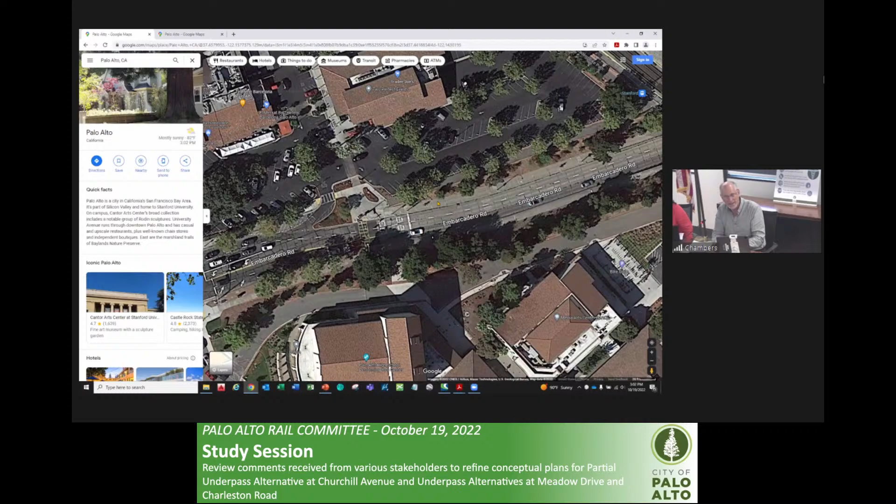And other than that, it's a really viable approach. I was having trouble visualizing it until I realized I do that every day, almost identical. And when I think about that, it's not very inconvenient at all. So that kind of changes my thinking when I have that point of reference. This is the location here you're referring to, is that right? Yeah, it's not in the picture, but yeah.

Right over here. Yeah. If you were, you'd have to have your helmet on. Yeah, I do always. And yeah, my light. We were just talking about this location the other day with our traffic consultant.

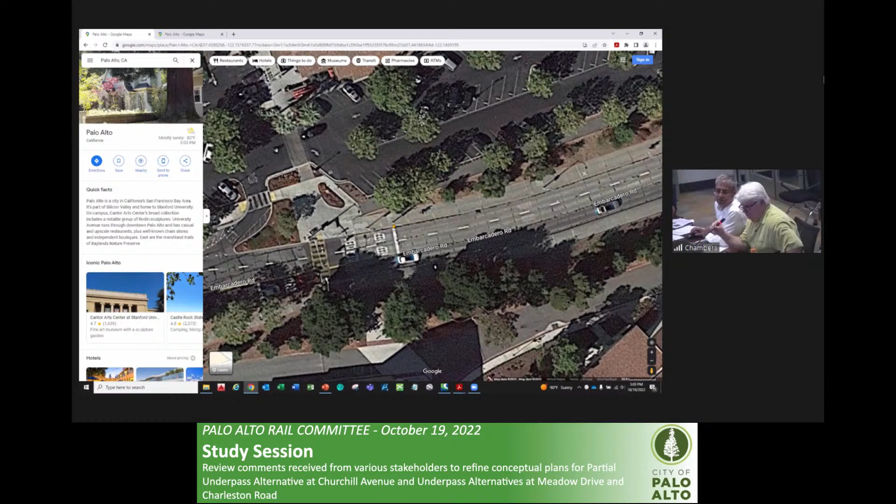Let's see, Peter, if you could go back to the slide you were just looking at for Charleston. Yeah. I want to just pick up on the mayor's comment by noting the one difference, I think, between this concept and what we have at Embarcadero is you will have a shoulder, right, as you proceed, which obviously is not the case on Embarcadero today, which for the more aggressive cyclists makes it more likely that rather than do the 180, you just barrel through the tunnel or the underpass, as the case may be. Not recommending it, but you could.

So I have a question on the same diagram. So coming from Gunn High School, can you show me how they're gonna access the brown part to cross the road, to cross Alma? Yeah, Gunn is down here. So it just goes.

Oh, yeah, you had to say yes again. Sorry, we lost our Wi-Fi. Oh, okay. I just got a prompt. So you probably got it. Still connecting.

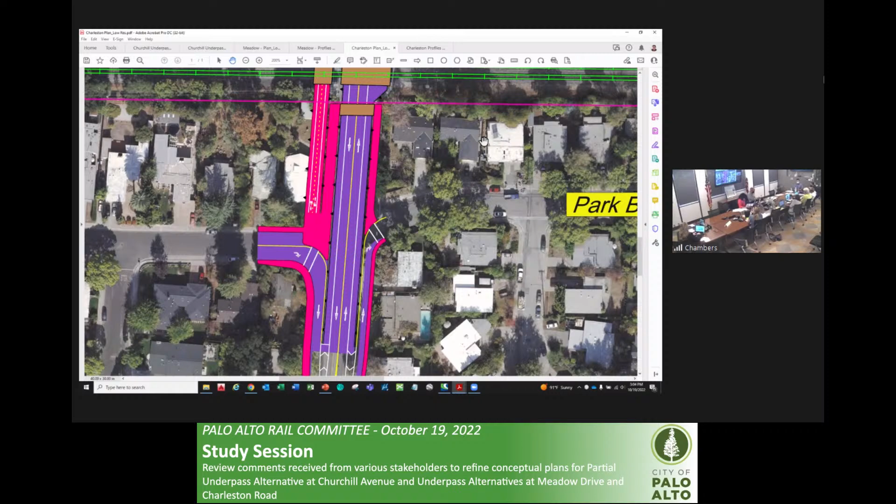While you're pulling up the map, if I could just comment on what Mayor Burt was saying in terms of figuring out the discomfort for the bikes. I will just point out that in the hybrid, because this is something XCAP discussed at length, in the hybrid and in the viaduct, you would essentially still wait every time at Alma for the light. And so even though you're removing the train situation that you have today, that light impact is pretty significant, especially at different parts of rush hour. And it also impedes the road traffic. It's part of why those intersections, even once you build a viaduct or a hybrid, in the future traffic studies still get an F as an intersection because of that interruption from the bikes and peds.

While you're doing that, I just thought I'll just add that I would like to see that the bike and ped not be only on one side, but on both sides. But at the same time, I think that we have to recognize that East Meadow is not the same width as Charleston. So that has to be taken into consideration. Then at the same time, at the intersections, with all the money and all the work that is going to be done, the flow should definitely be improving, and we shouldn't settle for something that is similar or the same as what we have now. So I just wanted to add that comment in.

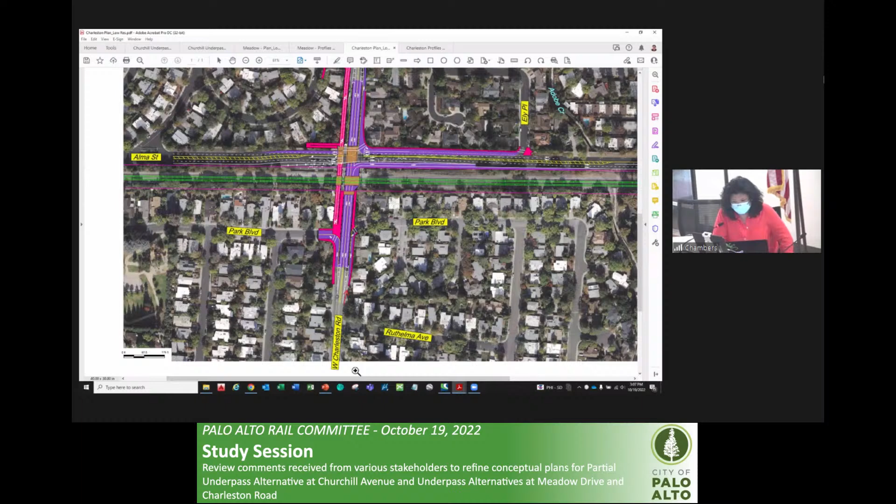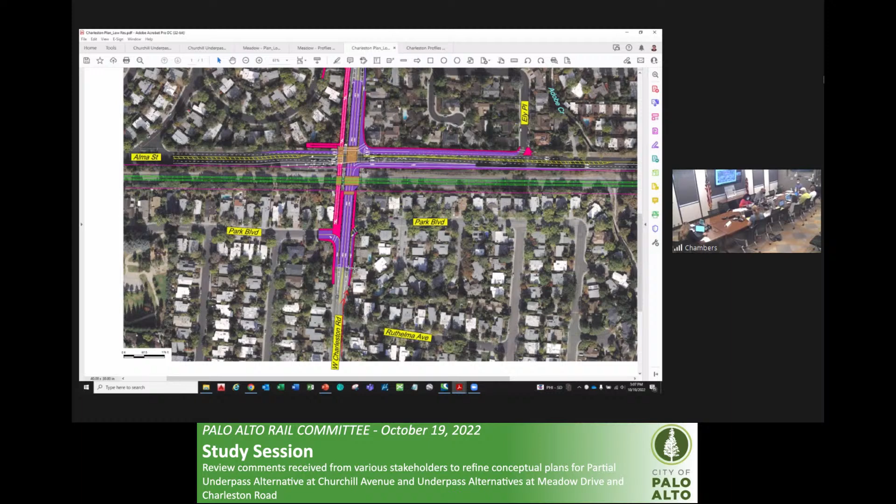And on pulling that diagram back up on Charleston, I just kind of want to understand and have a visual of how you would cross Alma when you're coming from Gunn High School. Gunn is to the west, is that right? To the west, that's correct. Okay, let me see if I can explain this one. So as a bicyclist coming from Gunn, you travel down Charleston over here. There would be somewhat of a decision to make here where the profile starts to descend down for Charleston. So you would bear right and stay at grade along the frontage.

Let me zoom in a little bit, it's hard to see. There we go, that's a little bit better. So you would bear right here along this, and then you enter the pedestrian path right here. I see now. And then, again, this is essentially at grade, maybe rising slightly, and then cross the bridge. Okay, I didn't see that entry. Yeah, it's hard to see. It looked like you just turn onto that road and onto Park, so where are they going? Okay, got it. Yeah, it's very hard to visualize three-dimensionally because there's different things going on.

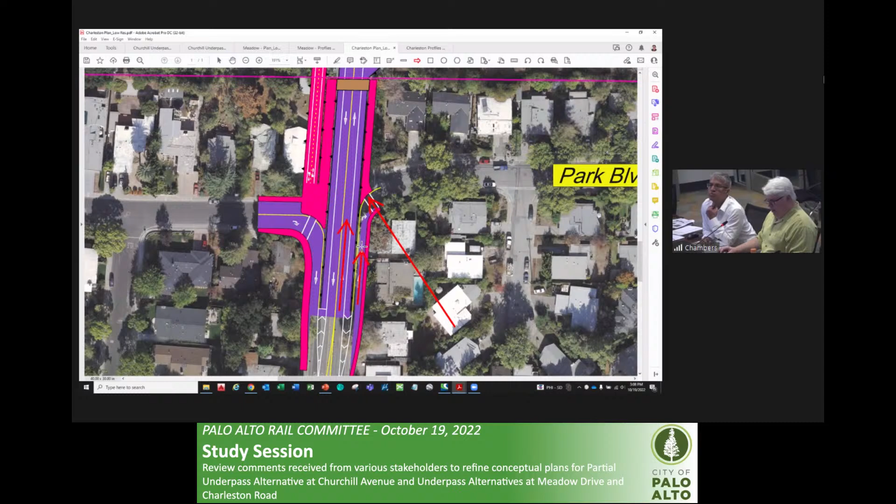This is starting to descend down underneath the tracks. And then on the right here, it's also purple, but it's just new pavement at grade. So these are different elevations here, these two arrows, if that makes sense. Okay, thank you so much. Sure. And just to add that in our future design plans, when we progress on it, we will have signing and striping that will make it more clear how that will be accommodated. So it's very preliminary at this time, but additional details will make it more clear. That'll be great. Thank you. Okay, next.

I think we're back to the Kellogg/Seale slide that we were wanting to get to. There is consideration for a ped/bike undercrossing at Seale, as was suggested by the stakeholders. This graphic just shows that Kellogg is closer to Churchill and Paly High School, but Seale is across from Peers Park, which many have mentioned offers more flexibility for access ramps on the west side.

And council has already provided direction on this, that the merits of this undercrossing should be studied, and that will be done as part of the bike and pedestrian transportation plan that's been mentioned earlier by Ripon. So once that update is available, whatever the results of that study and the council approval would be, we would incorporate it in grade separation accordingly.

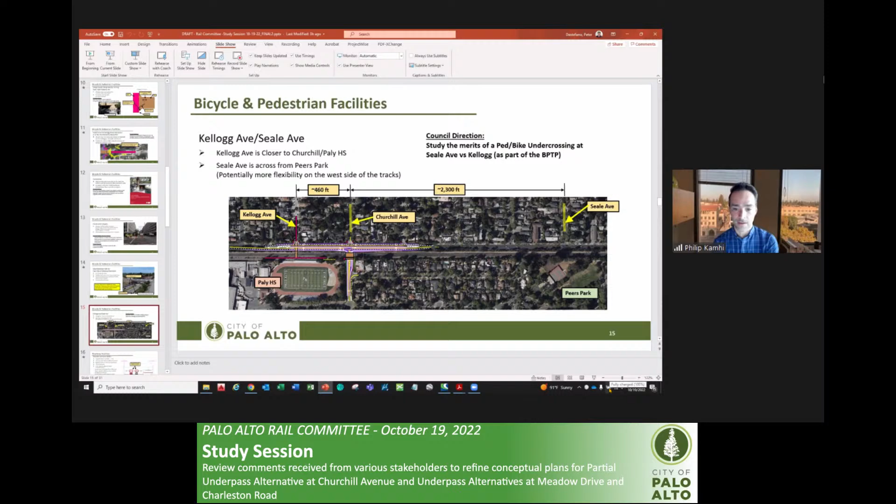That said, I just want to mention, as was provided to the council members, that this first round of funding that they received, I can't remember what it was, like 11 times or 17 times the amount of funding requests that they had funding for the programs. And only one project in California, actually a Caltrans project in San Diego, got awarded. And so I'm not saying that there's not a chance that we get awarded. I think it's definitely worth our time applying for some of these funding opportunities, but it's also not a guarantee.

To answer Councilmember Cormack, I think it was 2017, when there was a different consultant and we were trying to move quickly, and there were considerations of closing streets without really having done traffic studies. The consideration between Kellogg and Seale was discussed, and there was a council member who lives on Seale but further away who actually voted to remove it. And that's how it was removed. So when we started the public outreach, the alternative immediately came back.

And I will just say that when you guys are looking at the merits of Seale versus Kellogg, this map is deceiving because it's only really looking at the distance from the intersection at Churchill. If you were to turn the image 90 degrees and pull back the lens, you'll see that Embarcadero runs at an angle and it creates this kind of triangle. And so North Palo Alto at that point is a triangle, for which I think the dot maps would be super helpful. By the way, this is the first time I'm hearing that we had dot maps. XCAP would have requested those a long time ago. So I just want to say, as a fan of dots.

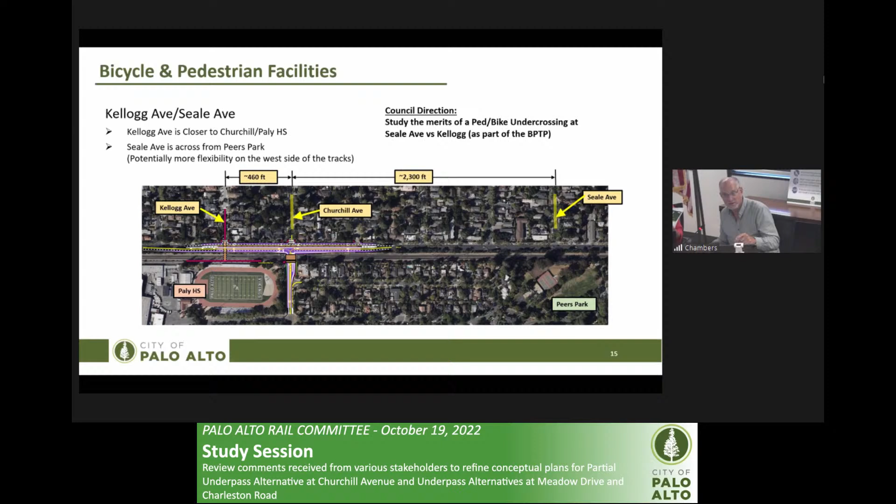Versus another alternative, which is El Carmelo, and have some restricted movements like we have on Bryant, so it's not a regular vehicular route, and could be one where we tend to have just local traffic of cars combined with bikes. And that remains to be determined, but that's my memory of the history. That influences a design on a bike and ped crossing, exactly where we might locate the connecting streets, and that would be a consideration.

Actually, council deliberated very carefully on saying in the vicinity of Loma Verde, to not exactly select a specific site. I remember it was like a back and forth iteration. That's right, to keep it open.

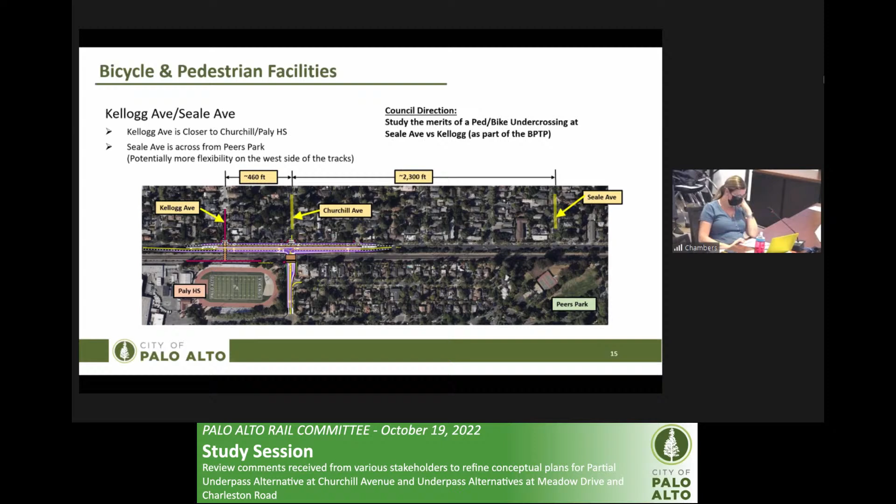Okay, we can go to the next one. Awesome. So we're going to change gears here a little bit. We've been talking a lot about the ped bike facilities, but we're going to focus a little bit on some of the roadway facilities here.

And just as a point of reference, a standard lane width is 12 feet and what we consider a minimum lane width is 10. And in this case, we are recommending that these lanes, the 12-foot lanes, be reduced to 11-foot lanes, but the shoulders remain at 8 feet. The shoulder width here provides space for bicyclists and disabled vehicles and other infrastructure, such as drainage inlets and signs. In addition, the shoulder provides space for turning movements for emergency vehicles.

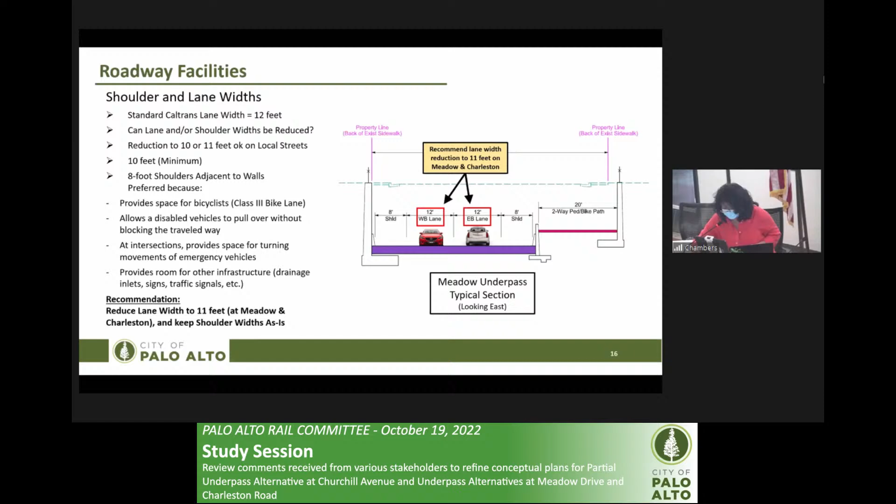Okay. Any questions? Any additions, comments? No? Wow. Next. Sorry, Chair Kou, I do have my hand up. Oh, okay. I'm sorry, I didn't see you. No worries, go ahead. We just go back.

And there's no other change, so we're just narrowing the width of the entire construction project. Yes, that's correct. Just a lane, right? It's just a foot of each lane, right? So 2 feet total. So instead of 12, it's 11.

Correct. Yeah, there were several comments from the bike community as well as some other community design engineers to narrow the footprint, which would help reduce the cost, as well as there was an issue about the bike lane, the shoulders, as well as the lane widths. So lane widths was something that we could easily include, and shoulders do keep the flexibility, so we'd like to maintain it as is. And then will there be parking on that street? No, this is the underpass portion. Oh, this is the underpass portion.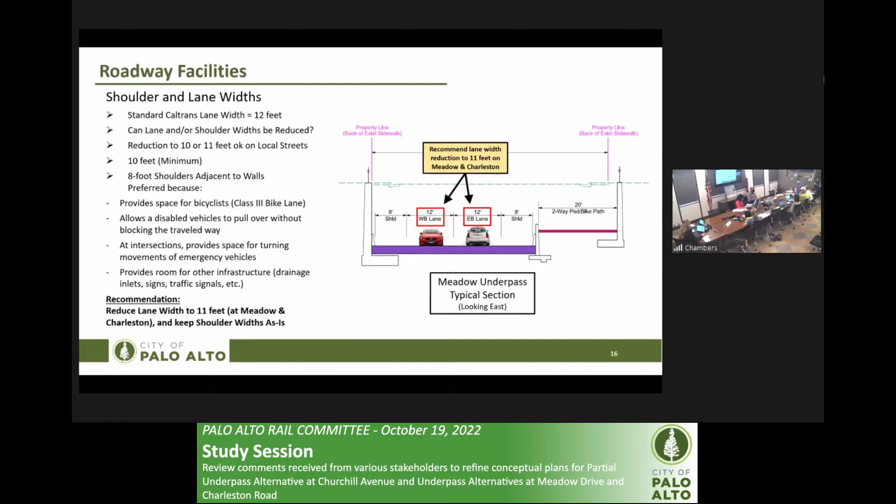I see. Okay. So is it also true that when you narrow the lanes, that's likely to slow people down a little? Correct. That does help in some speed reductions. Okay, thanks. Thank you.

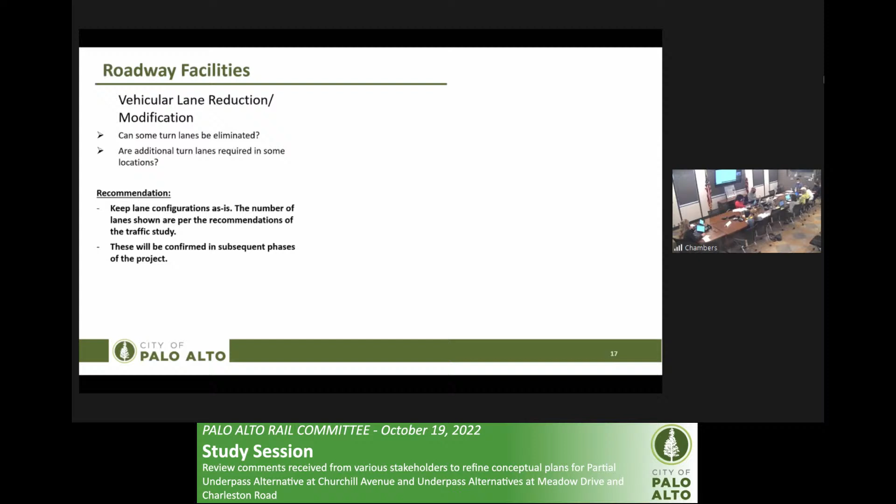Okay, the next one that we want to talk about is we received some stakeholder feedback about modifying the traffic lanes. For instance, we were asked if lanes could be reduced for the Churchill partial underpass, such that the 2 northbound lanes from Alma Street and the 2 eastbound lanes at Churchill could be reduced or left out. We are recommending that the lane configurations remain as proposed because this is consistent with our traffic study recommendations. And this could also be further confirmed in subsequent phases of the project if needed.

I just want to clarify. So when you're going to Alma, the 2 lanes, one is going to downtown and the other one is going south, right? Right. Okay. So the thought was that if we reduce the number of lanes, that would reduce the bridge span, and that would also reduce the bridge thickness and other things. So that was the thought process from the design engineers who were recommending to remove, but the elimination of the right turn lane could back up traffic on Churchill Avenue. So at this time, the recommendation was to continue with the configuration as proposed.

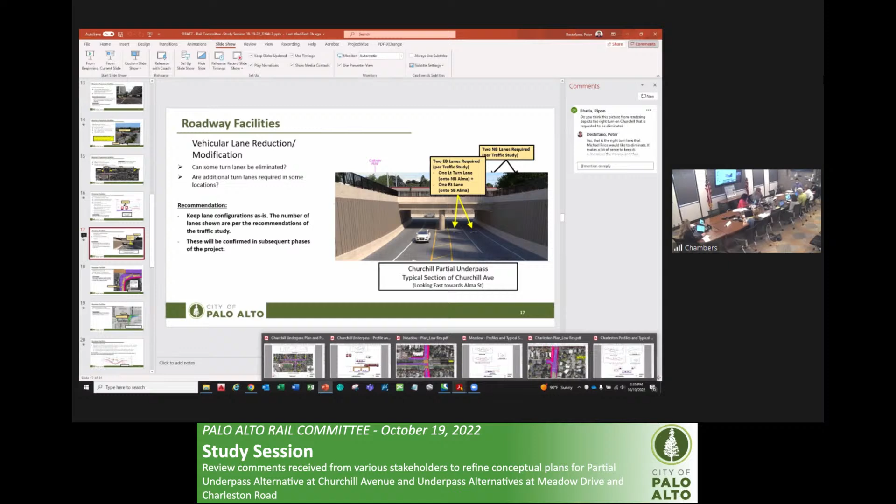Can you pull up the aerial view of this? The existing, or the map, or the plan? You want like a Google map or you want? Well, what do you want? I can tell you what I'm aiming for, and maybe you'll select a better one. So coming southbound on Alma, and blowing that up maybe.

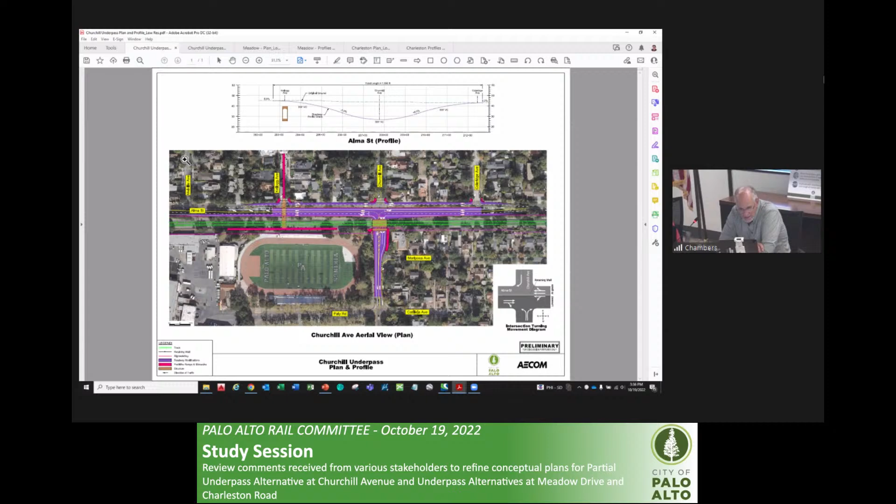It looks like we have 2 lanes. Is that correct? Or is it truly 2 lanes? That previous view that you had, it looked like there were 2 lanes. Yeah, the view we were just looking at was over here, looking this way on Churchill. But then it's 1 lane with a big shoulder on Churchill, as you turn right onto Churchill, as you're going southbound on Alma.

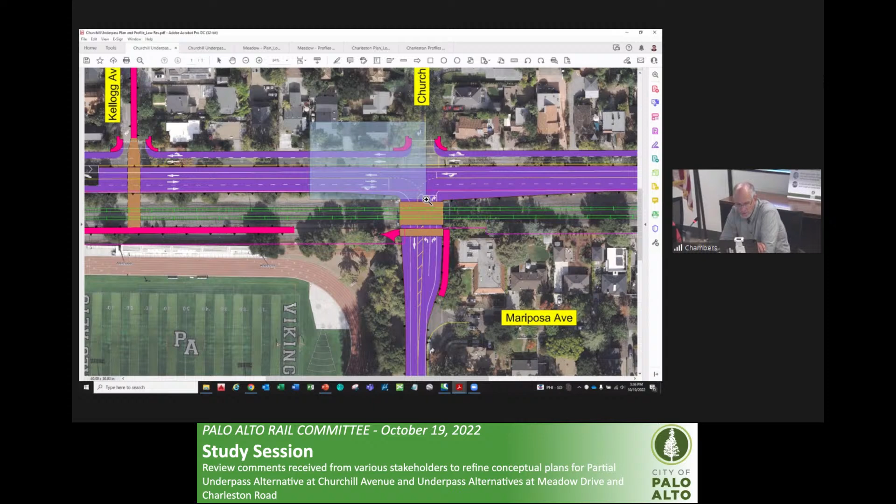So there's that wide shoulder, as it's southbound on Alma, and then you turn right onto Churchill. Correct. Yeah. And then there's that big shoulder there on Churchill. Why is that shoulder so wide? And if the issue was trying to narrow the Churchill underpass, is that an area that could be given up? We have another slide on that, don't we? Isn't that coming up? Yeah, I don't know if we have another slide.

That one in particular. Well, we have a slide about the design vehicle turning movements, not necessarily at this location, but that's why the shoulder is so wide here, is to accommodate a turning movement for a fire truck. But that has to do with the radius on the corner there. Right. So if we adjust the radius, do we need the underpass to be so wide? Yeah, because the underpass is so close to that turning movement. It wouldn't make sense to try to reduce the span.

Let me see if I could draw it. The edge of the vehicle is kind of like this. So we just squared off the structure to clear that. I don't know if I'm explaining that too well. Well, the property on Mariposa that Mike Price was concerned about is beyond where you squared it. Oh, okay. So if you scroll that up a little bit, so we see more west.

Michael was wanting to eliminate this right turn lane if possible, so that we could shift everything to the left or to the north, so that there'd be less impact to this property. So I'm wondering if you could shift it a bit to the left by eliminating that unnecessary shoulder there. So, the striping is not necessarily how the vehicles drive. This striping is mostly for regular passenger cars, but the emergency vehicles and the buses will go over that shoulder area.

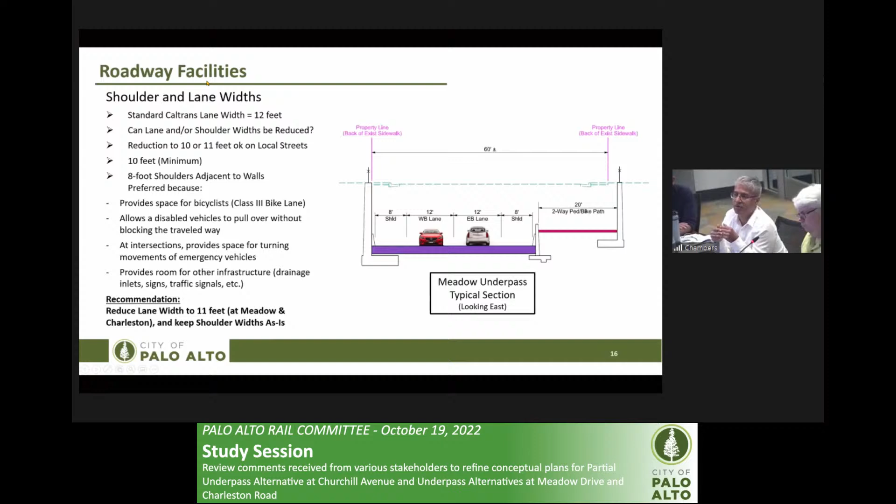And this is considerably wider, and we're looking at building that. Now, maybe there are reasons that it has to be, but those aren't apparent to me yet. Yes, that definitely will be considered when we look at the bridge design, the span length, and the support systems that are required. Right now, the median is to provide for the center support to the bridge. Oh, it's a center support median. Correct. So once we get into the more detailed design of the bridge, the bridge type selection and all the structural loading, live loading, dead loading, then we would be able to see what's actually needed.

That's right. And the question of how wide it needs to be where the tracks are crossing and you have the center support, versus whether you more rapidly truncate it so that the ramp from the west side is not as wide as it is currently drawn. Correct. It funnels down quicker. And that's the property in question on the south side there. So I don't know, but I'd like to see us look at optimizing that if possible.

I think that your comment makes sense. I think that's really something that we could take into the next phase of design for this project. I just want to also acknowledge that one of the comments that we received from PAUSD was to make certain that their buses can make these turning movements. So I just want to acknowledge that in the comments here because they want to be able to make those turning movements safely with the school buses.

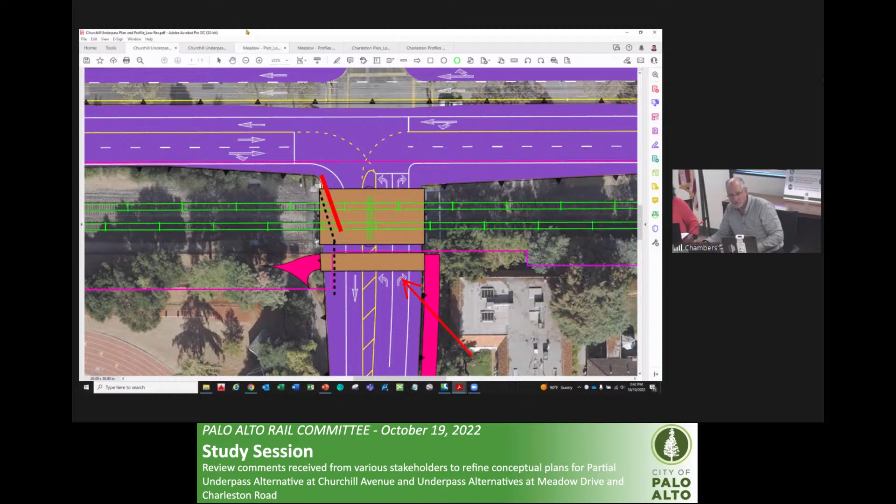Agreed, and we need to make it at least as accommodating as it is today. This looks significantly more so, but I'm not certain of that. Yeah, I just realized one other thing too. It's not just the right turn movement, it's also the left turn movement to allow for the bus or fire truck to make that turn. I'd have to go back and look and see. Because I was showing this black dash being maybe the potential layout of the bridge support and the retaining wall, but that may not be possible.

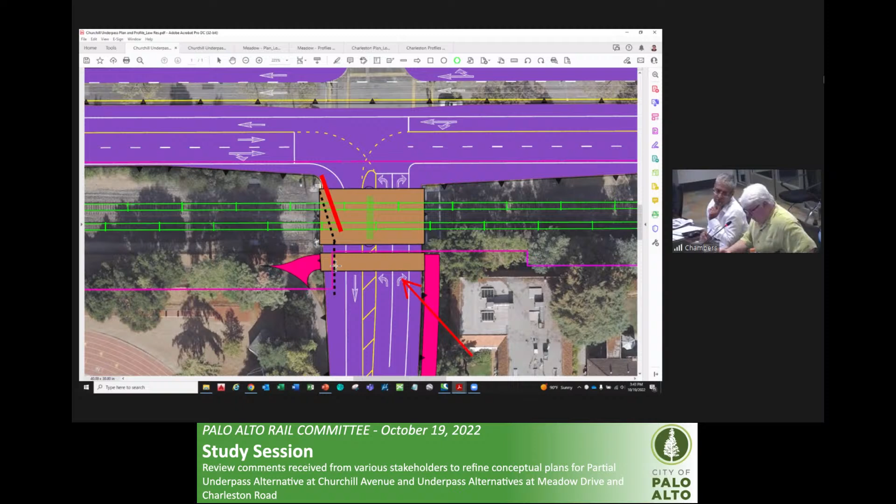Yeah, and I don't know. No, it's a fair comment to pursue optimization. Thanks. Absolutely. Yeah, I think it makes sense. Thanks. Nadia. So a couple of things.

One is, I forwarded to council last night the picture of what Rengstorff looks like. So Rengstorff's bridge looks a lot like the San Francisquito Creek Bridge, where you've got those trusses along the top, which allow you not to need a center support. So one obvious thing is to just remove the center support altogether, which gives lots of clearance for buses to make their turns. I think another thing that Mike Price is highlighting, which I think is important, is the red arrow that Peter drew on the diagram, which is that right turn go all the time.

So currently that serves an important function because the traffic kind of stops there, first because of the train, but then also because it's a three-way light, which, by the way, doesn't really make a lot of sense because a lot of people don't turn left on Churchill when you're going southbound Alma. I live in that neighborhood, so that lane is almost always empty. And it was something that was an anomaly in the traffic study. We saw that it was a barely used movement. That is exactly how this idea came forth, to not continue to the other side.

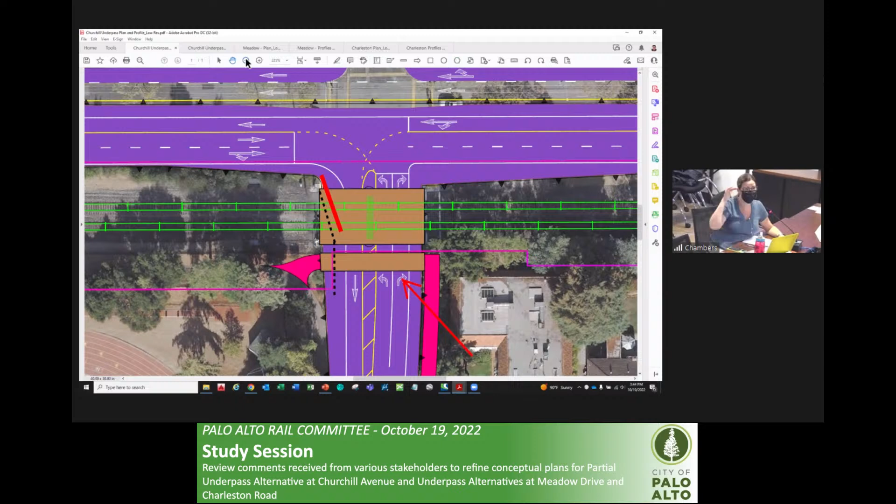But by leaving this right turn lane, now that you won't have a train interrupting it, you're going to get the same thing we get nowadays, where people sneak up on the right side and go into where the bikes are supposed to be, and then try to just keep going right all the time, which sounds like it would be good, except these folks now traveling southbound Alma are coming downhill. So you can't really see around that corner to see those people inching to make that right turn. So there's a safety question there: if this is going to be a light that controls that, do you really want to allow those right turn movements in a place which would have an impeded sight line since you're lower?

And I'll just follow up. I had forgotten about the Rengstorff design in Mountain View, where my understanding is that they have a design without a center support, and it's a longer span than what we're looking at here. And Caltrain has preliminarily approved that. Is that correct? That is correct. We've done the design work for that, but it did take a lot of back and forth to get that buy-off. But now they bought it on a longer span. Correct, but it was a lot of geometry finagling that we had to do to get them to agree to that.

But this goes to part of what we're working with Caltrain on, updating their design standards so that we don't have to go through the exception process so much. Yeah, and this was not an exception. In the future they will have four tracks there. So we wanted to have the bridge structure so that they could still build the other two without impacting all the things that would be built there. So there was a lot of back and forth to get them to agree to that type of structure. But it's still good that they have now agreed to that.

Right, but it's not a rubber stamp everywhere, right? Yeah. It is what it is. Well, we can have a preliminary discussion with them easily and just see whether they would have objections on this shorter span. Now that they've done that, is this a big issue or a little issue?

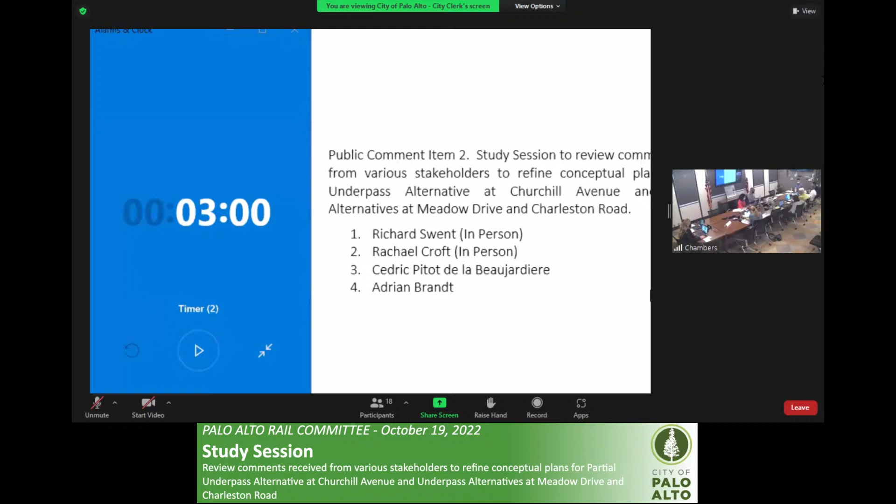Okay, so I am a member of the PABAC Rail Grade Crossing Subcommittee. I'm here on their behalf today. We sent you an email. It came from Bruce Arthur. And there's so much ground to cover here, and we're limited in time. So let me just thank you for soliciting all our feedback and for apparently reading all the comments and attempting to address them. And I'm not going to go into all the details here.

Let me just say one thing that I've heard from a couple of council members today: simplicity benefits safety. And these underpass designs are very complicated. That makes it very, very difficult to design them safely. So let's just keep that in mind going forward. Thank you.